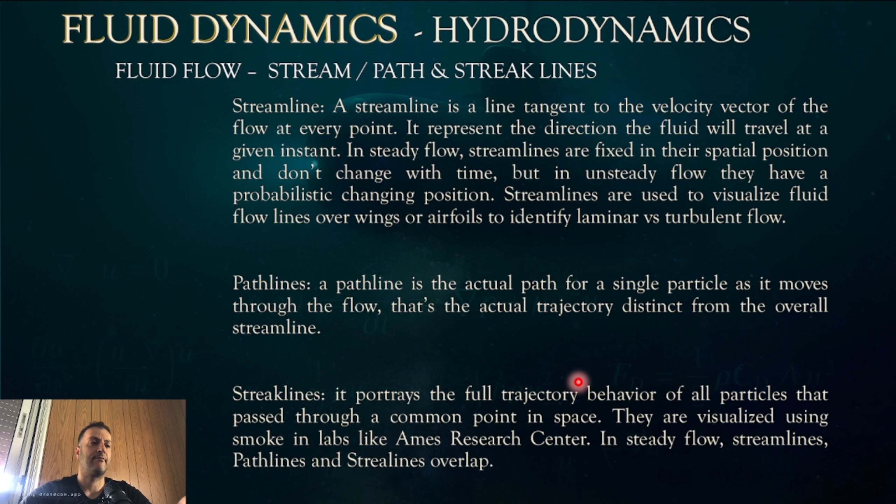Bernoulli's law for incompressible flow. According to Bernoulli, the pressure of a fluid is a constant.

In practice, let's say a fluid is flowing through a pipe with wide and narrow boundaries. The same amount will be flowing across the entire pipe, as mentioned in the continuity law. In wider boundaries, a large quantity flows slower, so we have a higher static pressure because the fluid is more stagnant, more static, pressing against the boundary, the axial boundary, the skin. You have higher static pressure, lower dynamic pressure.

But in narrow boundaries, the same amount will flow quicker, increasing the dynamic pressure. So what actually happens is that the dynamic pressure Q would be higher. However, you would have a lower static pressure, so it would press with a lesser force against the skin of the pipe, for instance. But in all cases, the pressure remains constant. That's the point.

What we're talking about is a constant pressure throughout a pipe system. Now, the entire pressure values remain constant. So P plus Q plus rho GH is equal to a constant.

Now, the pressure of the fluid against, like the pressure generated from a specific height, would be negligible. Why? Because throughout the pipe, there's no differential of pressure between the middle of the pipe and the bottom versus another point where you have a narrower section of the pipe. It's not such a high distance.

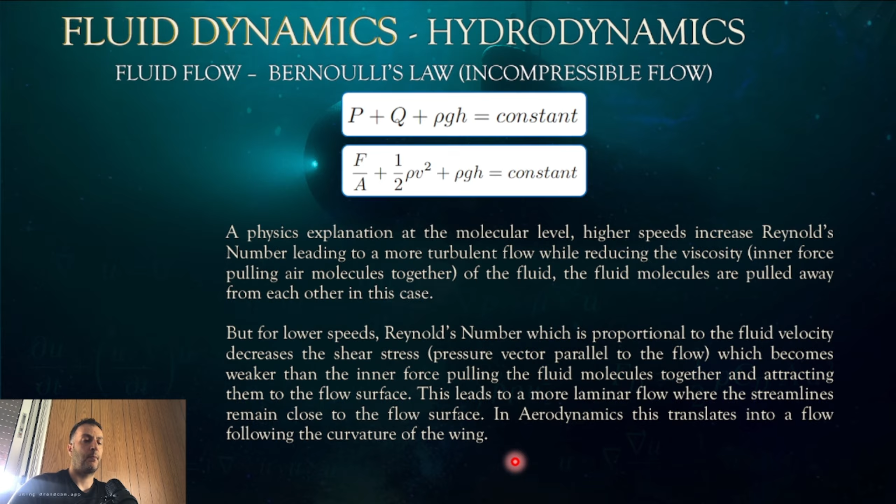Let's talk a little bit about Poiseuille's law. This law describes the laminar flow through a cylindrical pipe, and it quantifies how the flow rate depends on the fluid's properties and pipe geometry. So Q, which is the volumetric flow in meters cubed per second, is how much volume is traversing a cross section within a second.

Q is equal to pi R to the power of 4 (R being the radius of the pipe in meters), times delta P, which is the pressure difference between the two ends of the pipe, divided by 8 mu L, L being the length of the pipe. We notice immediately how the flow rate is inversely proportional to the length. So as much as you have length within the pipe, that would kill the flow rate, slowing down the flow of the liquid.

Meanwhile, when you have a differential of pressure between the first end and the second end, a high difference of pressure would increase the flow rate. And of course the radius of the pipe also influences the flow rate—for a larger radius, you would have a much higher flow.

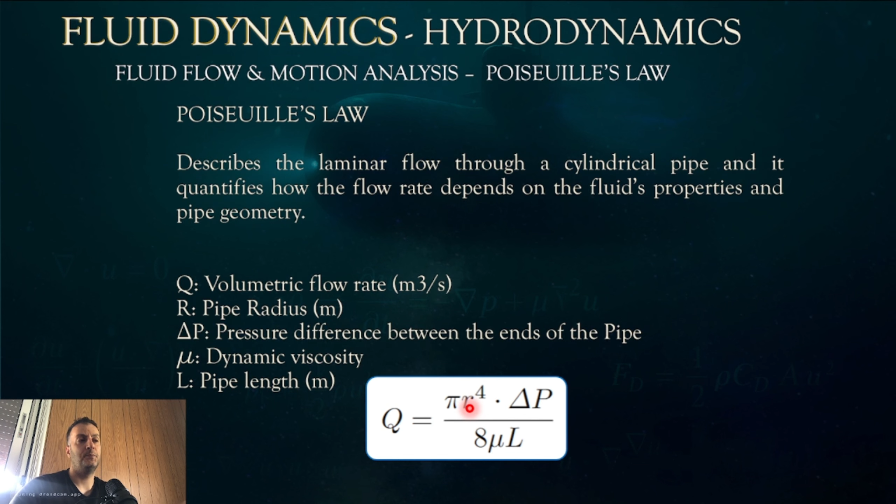Submarine lift underwater. Imagine a submarine fin or tail section underwater. How does it generate lift to climb from a specific depth to a more shallow one—from a very deep point to a more shallow point closer to the surface?

At first, despite the fact that Bernoulli's equations and the concept of lift and drag apply almost the same for both air and water, when it comes to water, it is nearly incompressible. So there's no significant change in temperature caused by the flow. Thus, the density is not changed and neither is the pressure.

As for the viscosity of water, it is higher than that of air, and this makes water more prone, more susceptible to flow separation. It is more sensitive to having its boundary layer—which is the layer of flow close to the surface skin of the hydrofoil—detach from the surface at high speeds.

So flow separation is when the fluid layer close to the surface detaches from it. Usually water, having high viscosity, is more prone, more susceptible to transitioning from a laminar to turbulent flow. This is what we are referring to exactly.

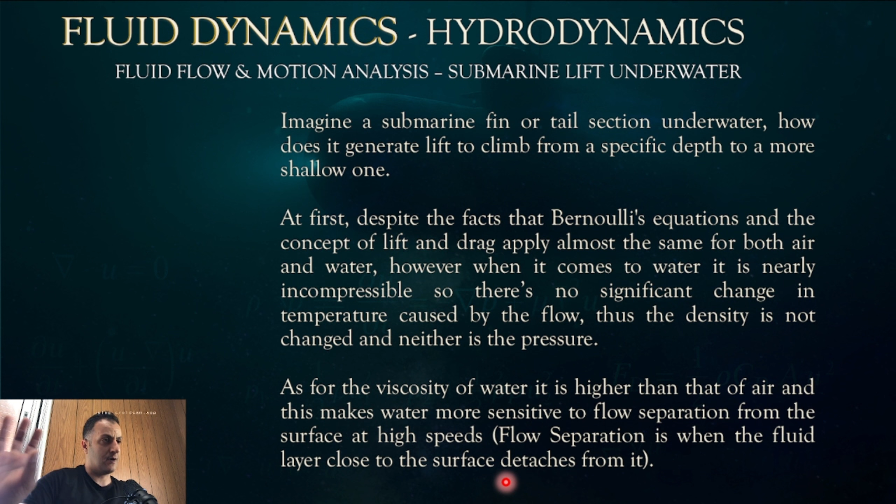Now let's portray the section of a hydrofoil—by the way, it's the same concept for aerodynamic wings. So what is the anatomy or structure of a hydrofoil? At first, the part that hits the water is called the leading edge—that's the edge that cuts through the water. Then the one behind, at the tip, is the trailing edge.

Between them you have a virtual line called the chord line. It is used to measure the angle of attack, which is the angle between this chord line and the flow direction of the water. You also have the upper part of the wing, called the upper camber, and the lower part, beneath the chord line, called the lower camber.

The fluid flows from the leading edge to the trailing edge in two directions: one above the foil through the upper camber, and one below through the lower camber. The chord line is an imaginary line connecting the leading to the trailing edge, used to measure the angle of attack between the flow path and that chord line.

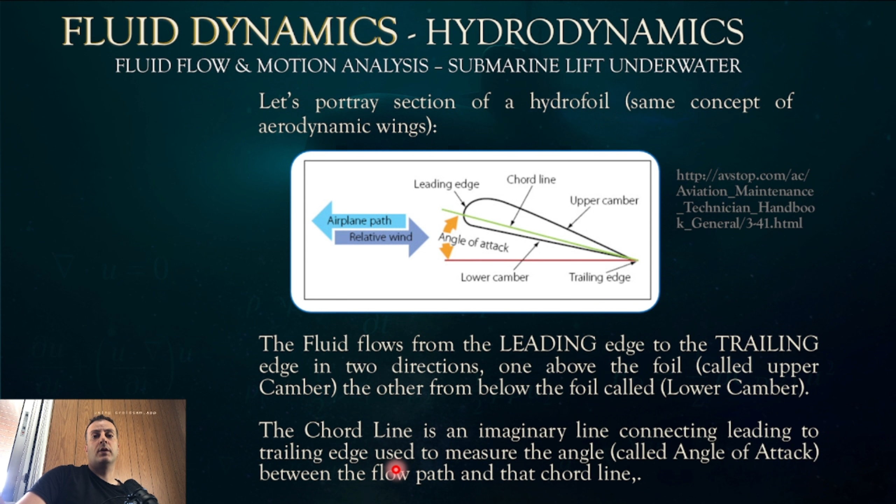Going back to Bernoulli's equation, the pressure is always constant from above or below the tail section or wing section, the hydrofoil in this case. In other words, based on the law of continuity, the mass linear momentum is constant from above and below the hydro wing. So the water flowing from above and that from below should arrive together at the trailing edge at the same time.

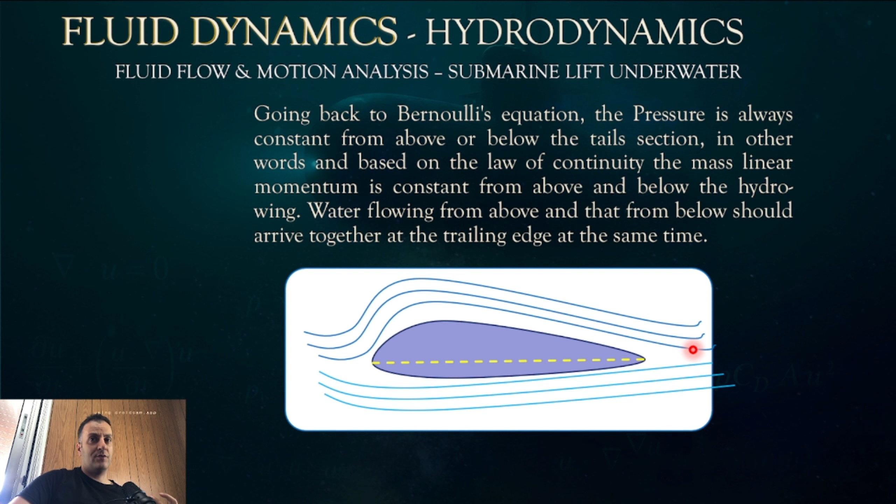So the water hitting the leading edge, flowing around either the upper camber or the lower camber, the same water points that were at the same alignment should arrive at the same time at the tipping edge of the wing section, which is the trailing edge.

However, the water traveling on the upper camber is following a curvature, a much longer path than the water flowing from below around the lower camber. The lower camber is more flat, so the distance traveled by the same molecules of water from beneath the lower camber is much shorter than the one traveled by those going around the upper camber.

Since they need to arrive at the same point or at the same time to the trailing edge, this means that the ones flowing around the upper camber should travel faster. So the dynamic pressure on the upper camber of the wing would be much higher. As a consequence, since we have a pressure constant, the static pressure on the upper camber would be lower than that on the lower camber, much less intense. So the differential of static pressure would make the water from below push harder than the water from above, which leads to a push, which we call lift.

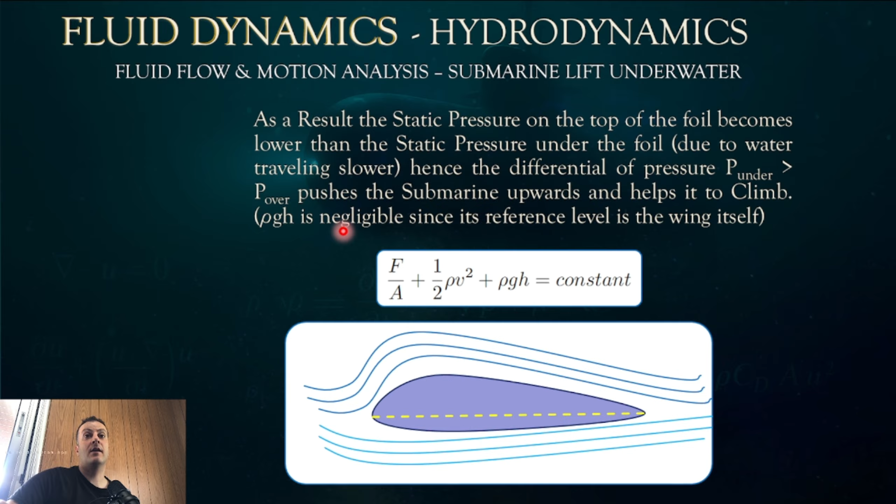Again, as a result of the high velocity for the fluid moving around the upper camber, the static pressure on the top of the foil becomes lower than that under the foil, against the lower camber, due to water traveling slower. Of course in aerodynamics that would be air. Hence the differential of pressure, P under being greater than P over, pushes the submarine upwards and helps it climb, creating lift. Rho GH is negligible since its reference level is the wing itself.

As a reminder: static pressure F over A, plus dynamic pressure 1/2 rho V squared, plus rho GH negligible, is equal to a constant.

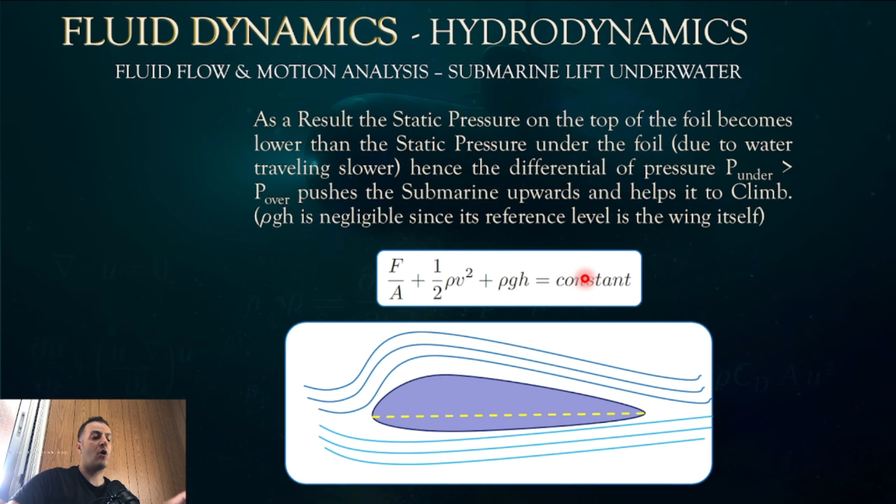Another way in which a submarine or any submersible creates lift is through Newton's third law of action versus reaction. Imagine you extend your hand from a moving car window. If it's still horizontal, you won't feel anything, it smoothly cuts through the air. But as you tilt it down, it gets in the way of the airflow. As it pushes through the flow, the wind pushes it upward, meaning the wind pushes back against your palm, pushing it upward, creating lift.

That's the same thing for hydrofoils in water. When you tilt it down, you increase the angle of attack, the angle between the chord line and the flow direction, which generates more lift and helps it go upward. Of course, with lift you have induced drag as well, which tilts the lift force vector backwards. So the resulting vector becomes slanted, not vertical, because you add the lift vector to the drag vector, which is the induced drag among other factors of drag.

The induced drag is generated because of lift itself, so the resulting vector would be slanted a little bit backwards.

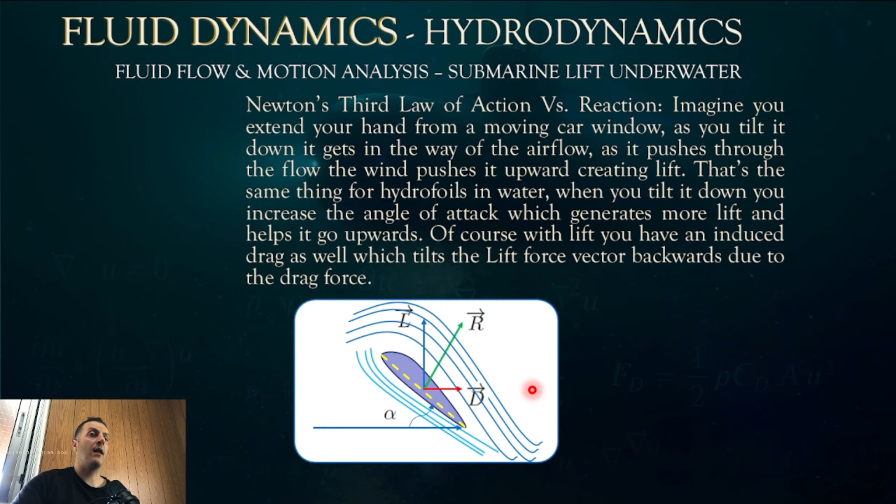As a side note, lift itself is generated, on one hand, by this Bernoulli equation of the pressure differential, and by Newton's third law of action versus reaction when you create an angle of attack against water as the hydrofoil moves through it. You need both of them. The law of Bernoulli alone is not enough to lift a submarine or even an airplane. That's why the airplane drops the flaps in order to take off. In the same way, the hydrofoil needs to tilt the angle back in order to travel or climb to a shallower depth. The lift force, like any force, is expressed in Newtons, and based on the concept we've discussed, there's a direct relationship between lift and dynamic pressure. They are correlated.

Lift and dynamic pressure are directly proportional. So what is the relationship between lift and dynamic pressure Q? L equals CL, the lift coefficient, which depends on the airfoil shape, surface roughness, and Reynolds number, times Q, the dynamic pressure, which is 1/2 rho V squared. That's the same thing shown in the equation below, which is an expansion of the upper equation.

It's still the lift equation. Q is equal to 1/2 rho V squared, V being the velocity, times the surface area. So as you multiply the dynamic pressure by the surface area of the wing or hydrofoil, times the lift coefficient, you get the lift force in Newtons. Rho is the air density in kilograms per meter cubed. V is the air velocity, or in this case the water velocity relative to the hydrofoil, but it's the same concept. S is the wing area, or hydrofoil area in our scenario, expressed in meters squared. CL is the lift coefficient, which depends on the airfoil shape, surface roughness, and Reynolds number.

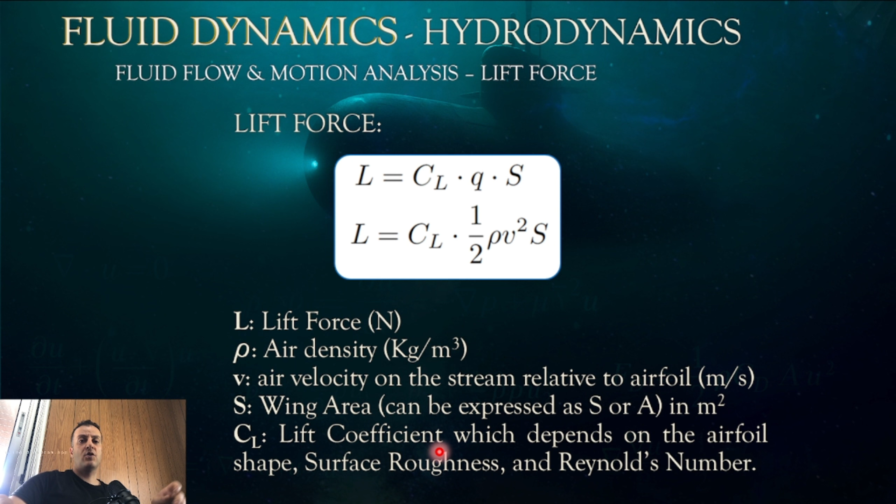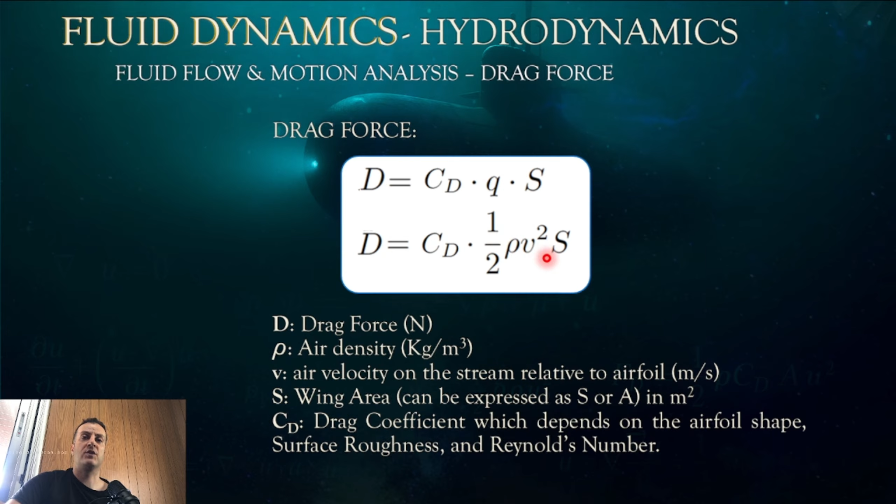The drag formula is very similar to the lift formula. Instead of lift, you have the drag force equal to the drag coefficient times Q. You also see the correlation between lift and drag, because when you have lift, you also have the forces of the fluid pushing against the wing or hydrofoil, and this creates drag. So D equals the drag coefficient times Q, the dynamic pressure, times the surface of the hydrofoil, equals CD times 1/2 rho V squared S. Same concept.

Let's do a small exercise. Say you have a fluid such as water, with density around 1000 kilograms per meter cubed. You have a sphere going through the fluid, flowing through water, or rather the water itself flowing against the sphere. The drag coefficient for the sphere is 0.47. For the water scenario, rho is 1000 kilograms per meter cubed, viscosity of the water is 0.01 poise, and the velocity of the water around the sphere, or equivalently the velocity of the sphere in the water, is 10 meters per second. The radius is 0.01.

Hence, the drag against the metallic sphere as it cuts through the water is calculated as follows. Note that S is the surface of the sphere exposed to the drag, which is half of it. The surface area of a sphere from the outside—not the cross-section of a disk within the sphere, but the full surface—is 4 pi r squared. The area exposed to the water flow, where the drag occurs the most, we assume is half of the sphere: 4 pi r squared divided by 2, equal to 2 times pi, around 3.14159, times the radius squared.

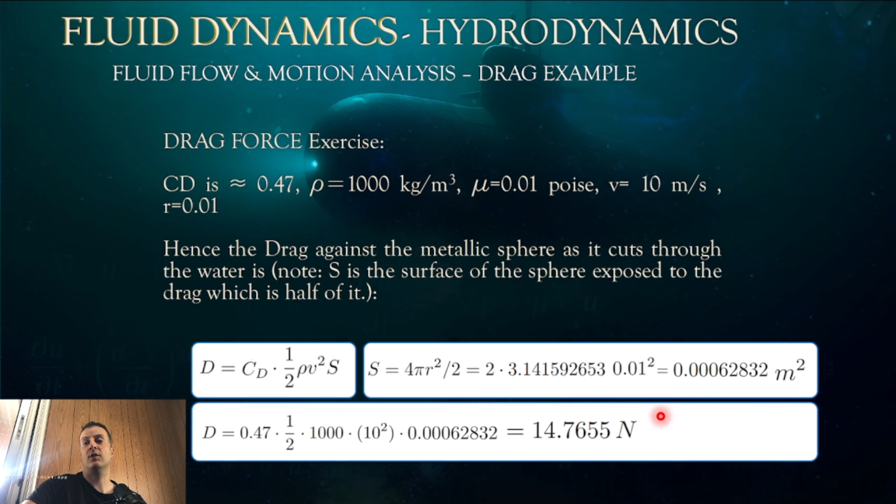Radius is 0.01 squared, so that equals 0.00062832 meters squared. The drag force equals the drag coefficient times the dynamic pressure, which is 1/2 rho V squared, times S: 0.47 times 1/2 times 1000 times velocity squared, times 0.00062832, which is the surface area exposed to the flow, equals 14.7655 Newtons.

Let's talk about Prandtl's theory and induced drag. According to Prandtl, a German scientist and engineer, elliptic wings are the most ideal for well-distributed circulation, generating lift with minimum induced drag caused by the downwash. We'll talk about what drag is and what the downwash is.

When the wing section, or hydrofoil, cuts through the water, it pushes against the water, so the water pushes back against the wing and generates lift. This is action versus reaction, Newton's law. But as the water flows down against the wing or hydrofoil, it creates what is called induced drag caused by the downwash. The downwash means the water flowing down after it pushes the wing up, which creates an induced drag.

Let's start with the concept of circulation. What is circulation? The circulation at point y is the sum of all velocity vectors around a foil. It's the integration of all velocity vectors over a wing section.

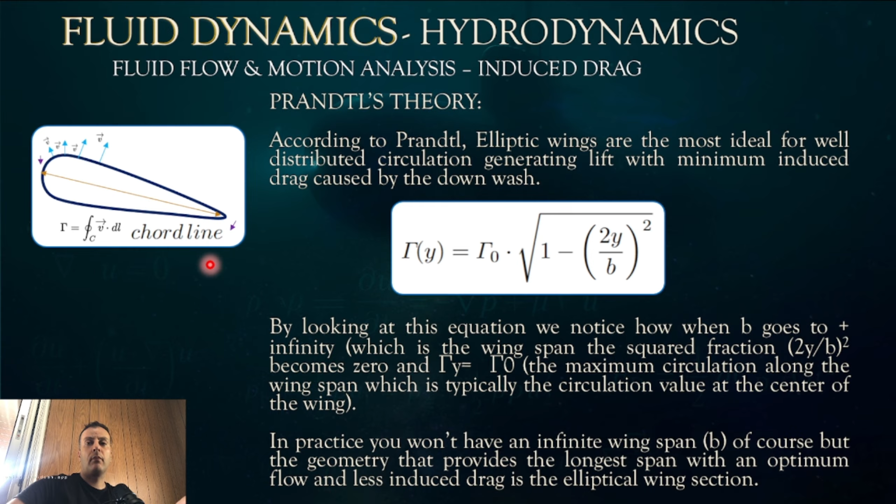Aspect ratio: in the previous slide we already addressed B, the wingspan, or the distance between the two tips of the wings, either aero wings of an airplane or hydrofoils for a submersible. Again, B is the distance from the first tip of one wing to the second tip of the next wing, or the width of the submersible. Now, aspect ratio is a ratio also related to the wingspan. It defines the geometry of the wing.

We have two types of wings usually. You have the rectangular simple wings. For that one, the aspect ratio is the ratio between the wingspan B, or the distance between the two tips of the wings, and the chord line length, the line connecting the leading edge of the wing to the trailing edge, only in rectangular wings.

However, in more complex wings, such as the ones shown here, it is the ratio between the wingspan B and the overall area of the wings, which is S here plus S here, the entire surface of both wings. For rectangular wings, AR, or aspect ratio, equals B over C, wingspan divided by chord line length. For generalized wings, AR equals B squared, the wingspan squared, divided by the surface area.

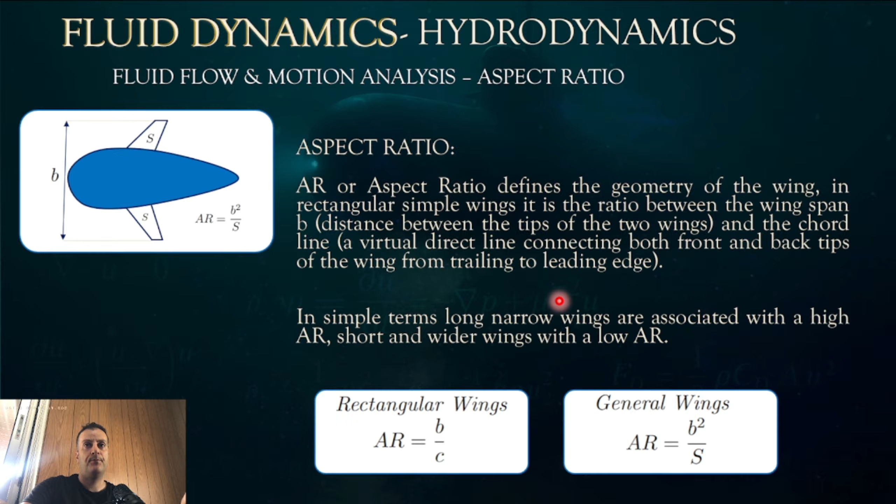Aspect ratio impact: the aspect ratio is not an unintentional measurement. It actually has a purpose behind it, as it is an essential factor that determines the hydrodynamic performance of the hydrofoil. We'll represent the difference between high and low aspect ratio in relation to different hydrodynamic parameters such as lift and drag. Let's start with high aspect ratio.

For high aspect ratio, it means that B (span) is greater than the surface area, or C for rectangular shaped wings. For high aspect ratio, the wings would be longer because B is very high, and narrower to get a smaller surface, like gliders, for instance, from an aerodynamic perspective.

The same concept applies for water. So characteristically, the lift factor is more efficient. They have a lower induced drag because of the downwash when the water flows through the hydro wing. The induced drag is usually smaller than that for a low aspect ratio, but structurally they are weaker. Why? Because the tips are far from the fuselage, so they are prone to bending.

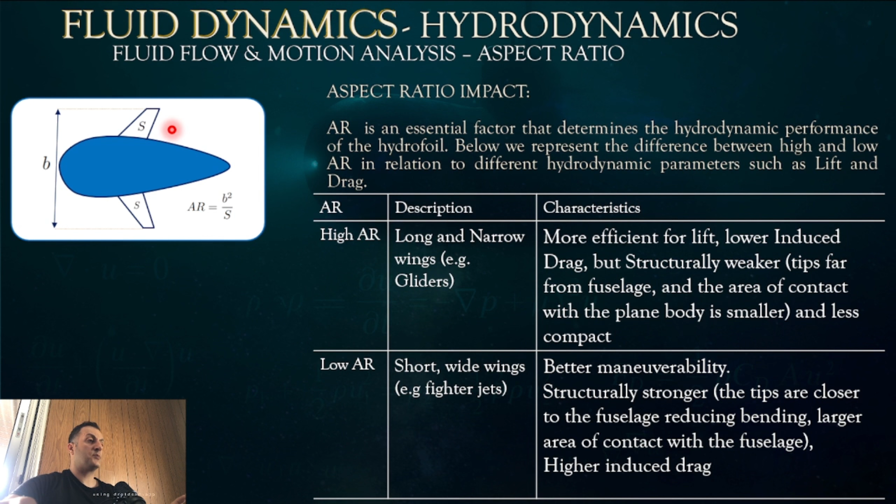Downwash and induced drag: in the previous slide, we touched on these two phenomena, downwash and induced drag, without expanding on them. So let's talk about these two things, and how they happen. What's the main cause behind them?

For the downwash, according to Newton's third law, for every action there's an opposite and equal reaction. So when the submarine's hydro wing generates lift as it pushes the water down and cuts through the water with high velocity, the water flowing down creates a downwash. But in its motion, it pushes back, reacting against this hydrofoil motion and generating what is called induced drag.

This is different than the drag that comes because of the motion itself; this is another component that adds to that drag. Induced drag means it is caused by the lift itself, caused by the action to generate lift on the hydrofoil. This is why it is called induced. So this downward flow of deflected water is called the downwash.

This phenomenon is usually more noticeable, visible, and observable behind the wingtips, as it creates vortices, eddies, and twirling spirals you see behind these hydro wings for large boats, submarines, etc.

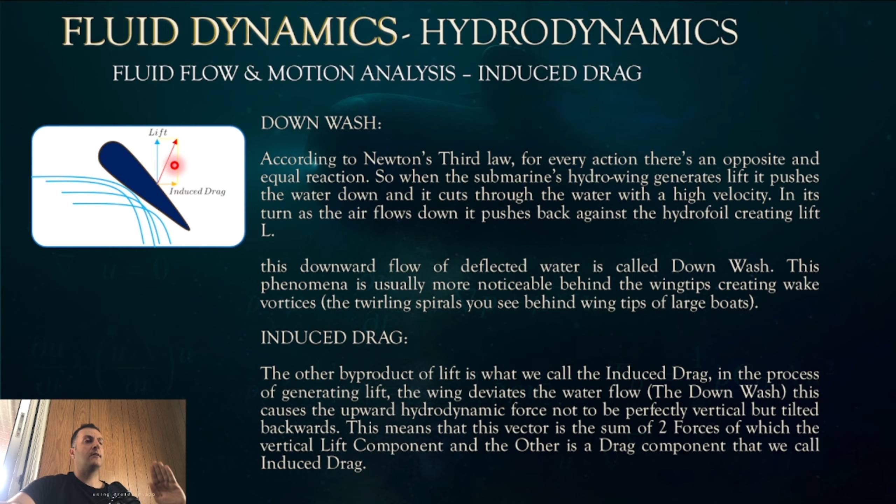What is the value of the induced drag? Induced drag is given by this equation: Di, or drag induced, is equal to pi E Q S divided by L squared.

P, or pi, is the same pi of circles. E is called the Oswald efficiency factor, or lift efficiency factor. It's a value between 0 and 1, determined by the type of wing or hydrofoil and its shape. For an ellipsoidal or elliptical shaped wing, you'd have a higher value for lift efficiency than for other types of wings or sectional shapes.

You have Q, the dynamic pressure. The dynamic pressure always has to do with the induced drag, the drag and the lift - they are correlated - times S, which is the surface area. For a larger surface, you'd have a higher induced drag, but it's inversely proportional to L squared. So for a more efficient lift, you'd have a smaller induced drag value. Again, Di equals pi E Q S divided by L squared.

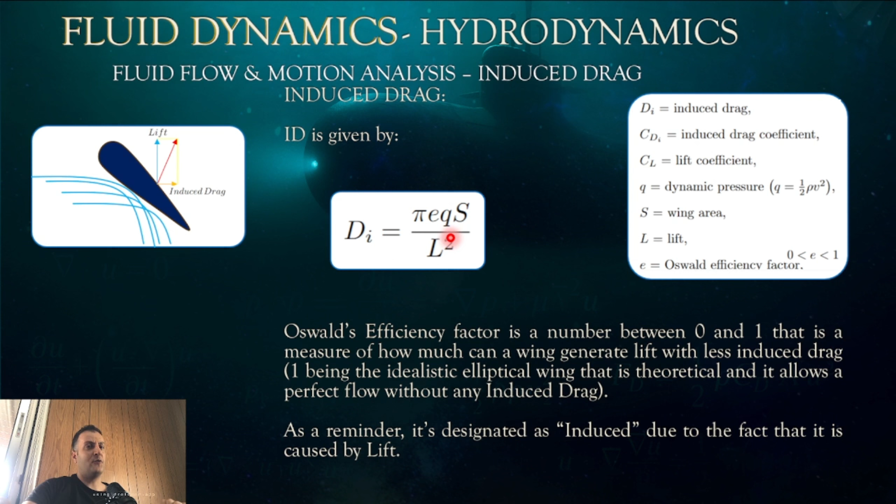All right, Prandtl's theory. A real wing is a finite model that produces a downwash behind it, which alters the effective angle of attack - not the real angle, but the effective angle, the angle that's actually working at the attack. This theory is a foundational fluid dynamics and aerodynamic model developed by Ludwig Prandtl, a German engineer, in the early 20th century, pertaining to finite aerodynamic wings.

The theory relates the geometric attack angle with the downwash induced angle. You have the geometric attack angle, which is different than the downwash induced angle, and the resulting lift, to come up with a consistent distribution. So it is correlated with circulation - let's put it this way.

At first, this theory applies when considering a steady, incompressible, and inviscid flow. Inviscid means the viscosity doesn't change. And it applies at a small angle of attack, also for a thin wing, which is the case for most commercial aircraft.

So what is the formula? Alpha y - it means that the actual angle of attack is different than the geometric angle of attack, which you measure by finding the angle between the flow direction and the chord line. The actual, effective angle of attack, the one playing out, is equal to the geometric angle of attack minus gamma y, which is the circulation, divided by 4 pi v, v being the velocity.

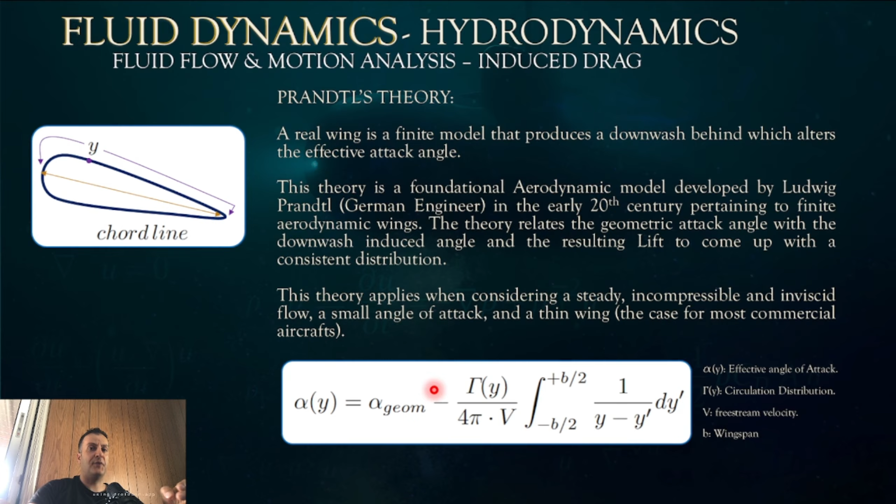So for a higher velocity, let's say v goes to infinity, this entire component here becomes 0, so the effective angle of attack becomes equal to the geometric angle of attack. Or when that circulation ratio, y minus y prime, becomes infinite - when this entire component becomes 0, then alpha y becomes alpha geometric.

Going back to aspect ratio, AR. By resolving Prandtl's equation, a relationship was established between the coefficient of induced drag and the aspect ratio. So with higher aspect ratio, we have less induced drag. This is what we mentioned before.

Let's break it down for a visualized airplane model or submersible model, and try to figure out by reasoning whether this submersible or airplane would have a high or low aspect ratio, and how it would perform aerodynamically or dynamically in the fluid.

This is what interests me the most here. The drag coefficient is equal to the lift coefficient squared, so they are truly related to each other, divided by 4 pi e, which is the Oswald factor, times the aspect ratio. Again, the aspect ratio is the ratio between b squared, or the wingspan, divided by the surface area.

So for a high aspect ratio, you have less induced drag. For longer wings, you would have less induced drag, correct? This is what we're talking about mainly in this case.

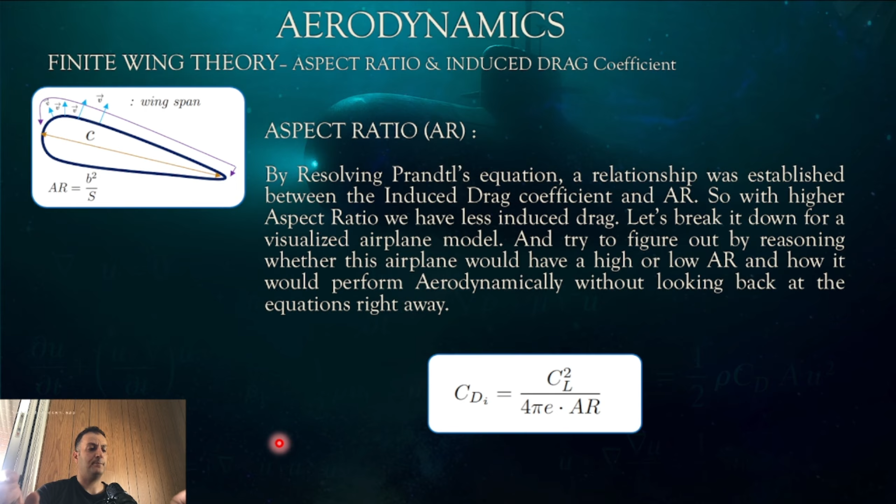Let's do an example for Reynolds number. If we recall the other exercise where we found the drag against a metallic sphere of radius 1 centimeter drowning in water, let's calculate right now the Reynolds number for the flow. So the metallic sphere having a radius of 1 centimeter, or 0.01 meters, is drowning in water.

Rho is equal to 1000 kilograms per meter cubed at 20 degrees Celsius. Viscosity is equal to 0.01 Pascal second. Actually the real value is 10 to the power minus 3, but let's assume that this value is correct. In this case, with a speed of 10 meters per second, what is Reynolds number?

So RE, or Reynolds number, is equal to rho V L divided by mu. L is the sphere diameter in this case, or the distance of the flow we are considering. So Reynolds number equals rho V L divided by mu, which is 1000 times 10, the velocity, times 0.02, which is twice the radius, the diameter being twice the radius, or 0.02 meters, divided by 0.01, which is the viscosity, equals 20,000.

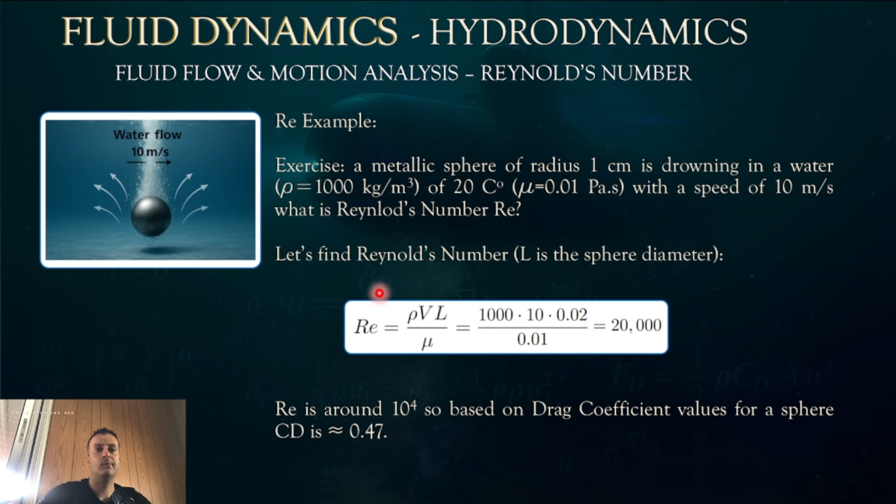Forces acting over a hydrofoil. Let's consider, for instance, a submarine, like in this illustration. What are the different forces acting against this submarine? At first, T is the thrust force pushing the submarine forward, usually generated by the propellers, the system of blades at the rear end of the submarine, not shown in this illustration.

As they push the water backwards, the water propels the submarine forward. That is the conservation of linear momentum. This is also Newton's third law of action versus reaction. You push the water backwards, so the water propels the submarine forward.

Then D is the counteracting force against the thrust, which is the drag. Both the one induced by lift, which we've referred to before when rotating or tilting the hydro wings, and the one that is generated by the movement itself as the submarine cuts through the water layers.

Then you have L, which is the lift force generated by both the attack angle and the shape of the hydrofoil wing. By the way, in leveled motion, meaning you're holding the same altitude, usually you don't use much attack angle. You are counting alone on the shape of the hydrofoil, the shape of the hydro wings, which generate enough lift to counteract the weight of the submarine.

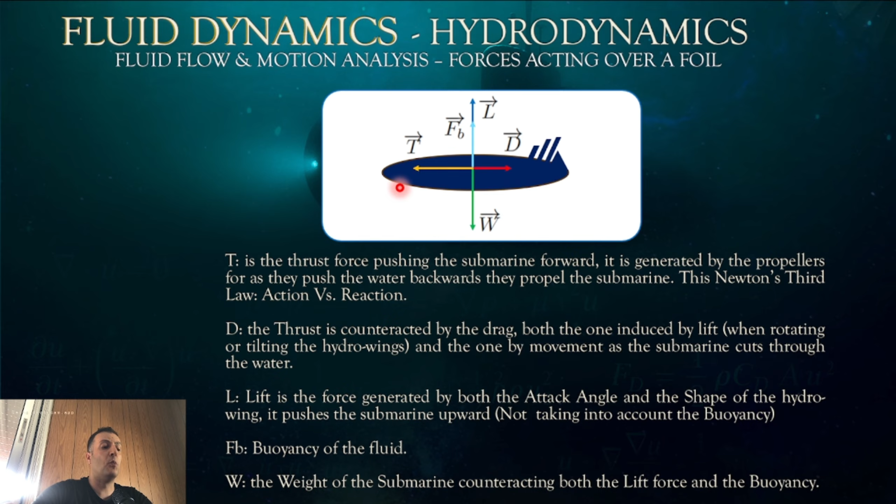And finally, the final force is the weight of the submarine counteracting both the lift force and the buoyancy, which pushes the submarine downward. So when these forces are equal to each other, you have a dynamic equilibrium, meaning the entire submarine is moving at the same velocity. That is Newton's first law of equilibrium, both dynamic and static. Static means it is motionless, perhaps on the dock, and dynamic equilibrium means there's no acceleration or accelerated variation, so the velocity is kept the same throughout the motion inside water.

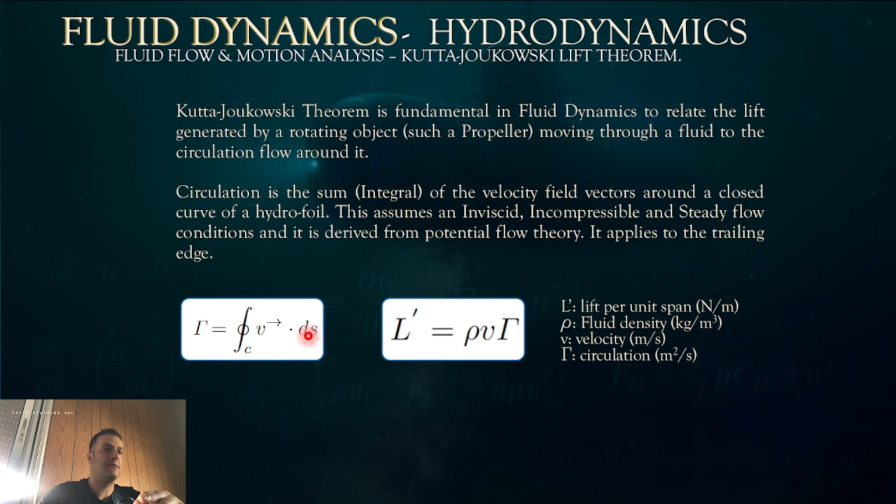So the lift force is equal to rho times V times gamma. In other words, it is equal to the fluid density in kilograms per meter cubed, usually 1000 for water, but it changes due to the temperature of the water at specific depths, times the velocity of the fluid around the submarine, times the circulation value, which is an integration of velocity vectors around a closed loop times ds, integrated throughout the surface.

Now let's talk about another concept, which is the energy head. What is the energy head, or head of pressure? By definition, it is a way of expressing different forms of energy, such as pressure, velocity, and even elevation, as their equivalent in potential energy, or an equivalency value for fluid height in a column. So what would be the equivalent of dynamic pressure in height terms? That would be 1/2 rho v squared equal to the pressure over a height, which is rho g h. What is the equivalent height to get the same value for dynamic pressure? We are expressing different types of pressure energies in terms of height or elevation. This is essential for understanding how energy is transferred in flowing fluids, like in Bernoulli's equation.

So you have three types of heads. First, the elevation head, or Z, which is the potential gravitational energy of a fluid because of height - the height above a reference level, for example a water reservoir mounted on concrete pylons, that would be the height from the water tank down to the ground where the poles are standing. Then the pressure head, which is P over gamma, the height of fluid that would cause that pressure, where P is the pressure and gamma is rho g, the specific weight of the fluid causing that pressure.

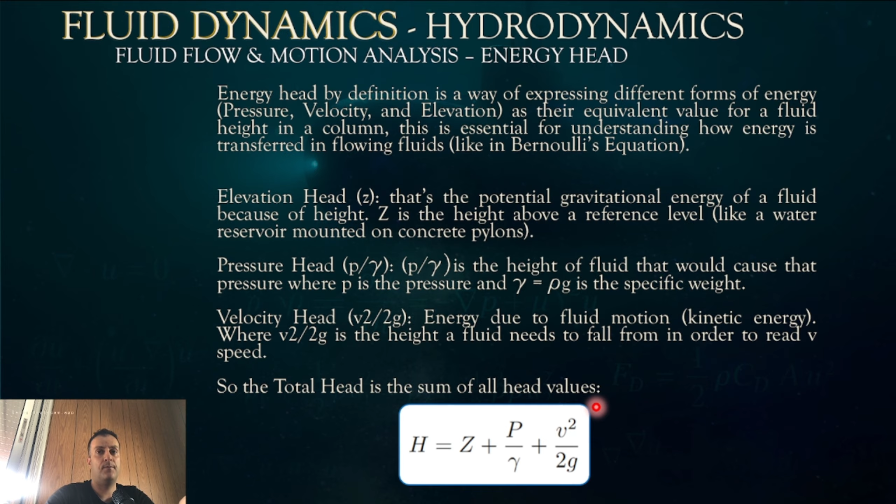To give a practical example, let's say water flows through a pipe from a tank. At a point you measure elevation: the elevation of the pipe is 5 meters, pressure P is 50,000 Pascal, and velocity V is 3 meters per second. The fluid density is rho equal 1000 kilograms per meter cubed. The gravitational acceleration is about 9.81 meters per second squared on the surface of the Earth, that's the average, since gravity is higher at the poles where you're closer to the core, and slightly lower near tropical areas where the Earth is a bit more compressed and farther from the core.

So let's convert the pressure to pressure head. First you have P over gamma for the pressure head, which is 50,000 Pascal divided by gamma, gamma being rho times G, the density 1000 times the gravitational acceleration 9.81, equal to 5.1 meters.

Second, the velocity head, which is V squared divided by 2G. V is 3 meters per second, squared, divided by 2 times 9.81, equal to 9 divided by 19.62, around 0.46 meters.

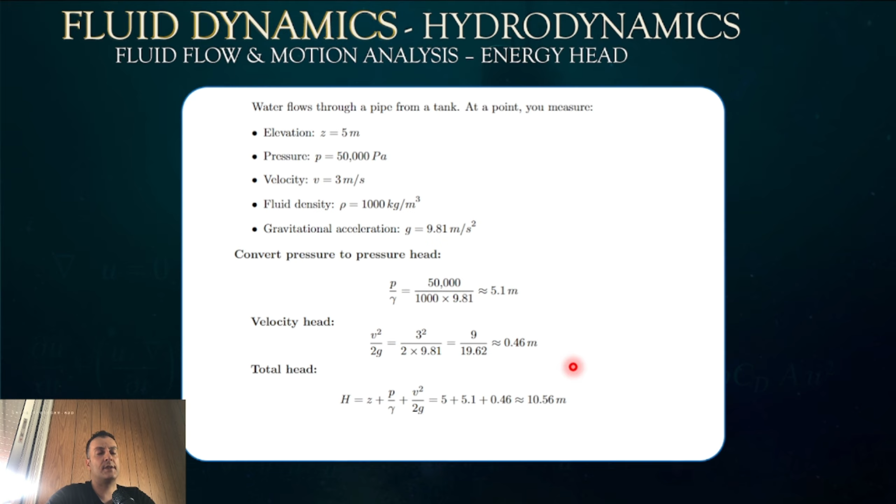Let's talk first about the laminar boundary layer. Laminar boundary layers appear for relatively low speeds and smooth surfaces. We cannot have rough surfaces if we want the flow to remain perfectly laminar, meaning it is layered, one layer on top of the other, with no turbulence and no rotational trajectories for the fluid particles.

Characteristics: the flow is smooth, with ordered layers of fluid flowing on top of each other, with a regular curvature following that of the wing surface. Velocity vectors are smooth and parabolic, increasing gradually from the surface.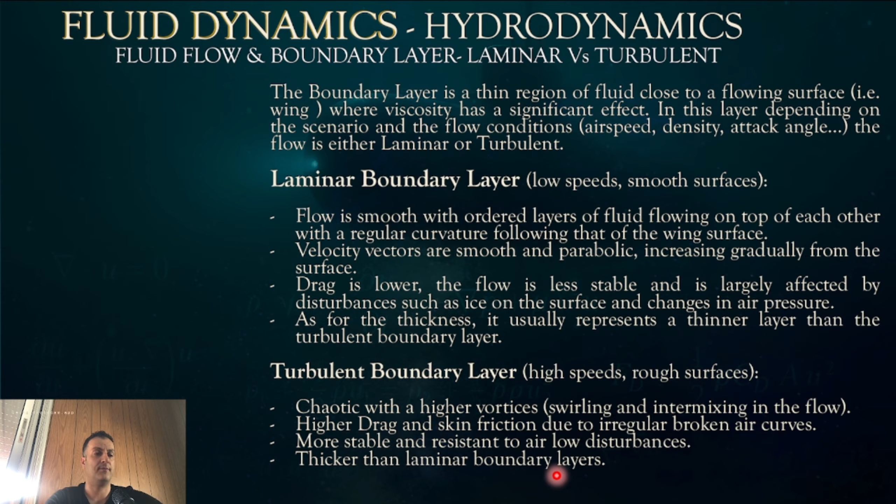As a reminder for laminar versus turbulent flows: for laminar flows, the flow directions or lines are parallel to each other, where the maximum flow speed is at the center of the flow, and there's a stability of velocity across different lines. As for turbulent flows, you have rotational flow, vortices, and an intermixing between different molecules of the fluid, such as in a pipe flow. The u vector, the velocity vector, is changing - it's not stable, it's non-uniform.

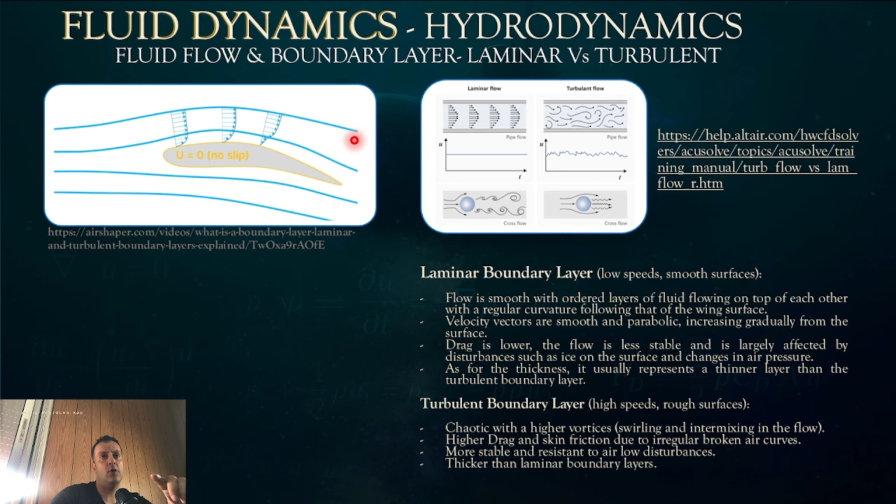Also, for laminar flow, the thickness of the boundary layer is very thin - it's very close to the surface of the hydrowing. For turbulent flows, you have a much larger separation between the curvature of the flow and the hydrowing itself.

Now let's talk about the values of velocity for a laminar flow - velocity vector u and boundary layer thickness. For a laminar profile, the characteristic is u divided by U, where u, or small u, is the velocity at a distance y from the surface, and U is the free stream or maximum velocity. This is around y, the distance, divided by delta, the boundary layer thickness, to the power of n, where n represents a shape factor or velocity profile characterizing the distribution of velocity around the boundary layer.

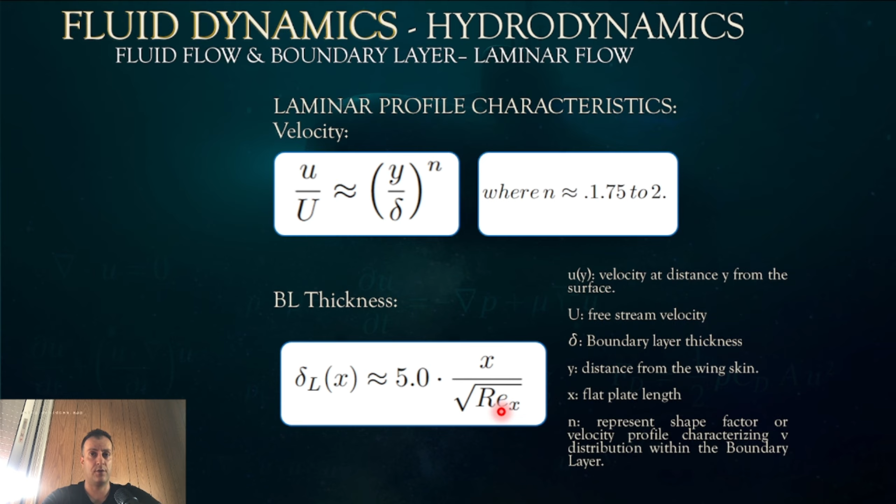n is around a value from 1.75 to 2, depending on the shape - you can get it from a chart. As for the boundary layer thickness, it is around 5 times x, where x is the flat plate length, or the length of the chord line, divided by the square root of Reynolds number.

As for turbulent profile characteristics, the velocity u divided by U - again u is velocity measured at a distance y from the surface skin. So if you go up from the hydrowing, we are trying to measure the velocity of the flow at a distance y, a thickness y from the wing, divided by U, the free stream velocity, which is around y divided by the thickness of the boundary layer.

By the way, y is less than delta. Y is at a point depending on where we are measuring, but delta is the thickness of the boundary layer, so y is measured in the same direction as delta - it is the thickness from the surface of the hydrofoil to a specific point.

So u divided by capital U is around y divided by delta, to the power of 1/7. Again, delta is the boundary layer thickness, and y is the point of measurement above the wing, the hydrowing or the aerodynamic wing, depending on the scenario.

As for the boundary layer thickness, it is around 0.37 times x, where x is the cross-sectional distance of the wing from the trailing to leading edge, divided by the square root of Reynolds number to the power of 1/5, where Reynolds number equals ux divided by nu, the kinematic viscosity.

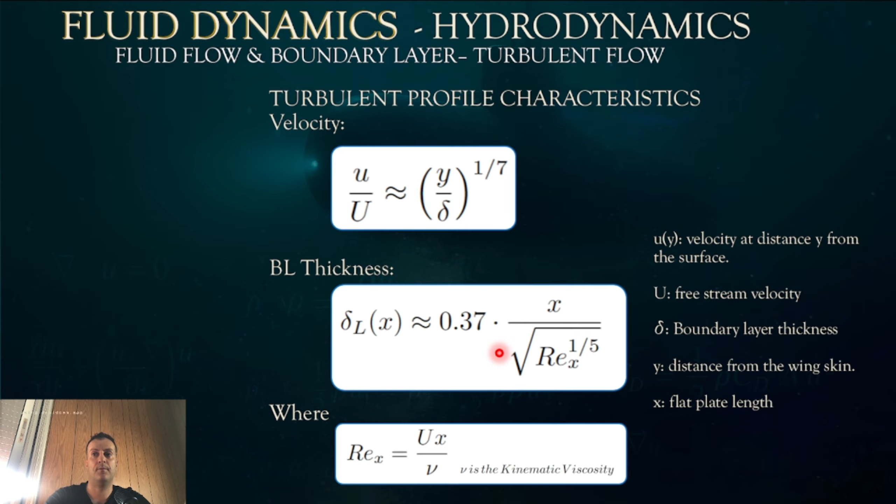Flow separation happens when the boundary layer adhering to a surface detaches. This is mainly due to adverse pressure gradients overcoming viscosity. Viscosity keeps liquid molecules ordered in a streamline and close to the flow surface. This usually happens when the fluid slows down to a point where the streamlines become very weak and are easily broken by adverse pressure. So the adverse pressure pushes against the viscosity on the surface area of a hydrofoil, peeling away this boundary layer - the fluid flowing close to the wing surface moves slower due to viscosity.

Because viscosity is high near the surface, near the skin of the hydro wing, especially when the wing crosses a region with high liquid pressure, like cooler water, or when the velocity is very low. If the fluid is moving very slowly, like in low power engine or propeller configurations and hence lower water speeds, adverse pressure can pluck the boundary layer away from the hydro wing, leading to flow separation.

So the boundary layer separates from the hydro wing, and it has dire consequences at times for airplanes more than for hydrodynamic vehicles.

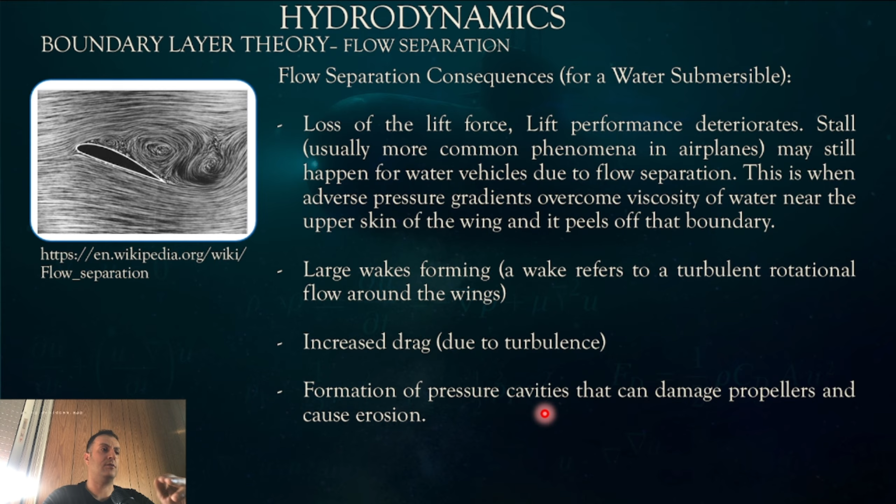Going back to head pressure, which is the equivalent of pressure in height terms, what are the major and minor head losses? In fluid mechanics, head loss represents the loss of mechanical energy or pressure head due to friction and disturbances as a fluid flows through pipe systems interconnected with different widths and curved connections and fittings. So the total head loss is equal to major head plus minor head.

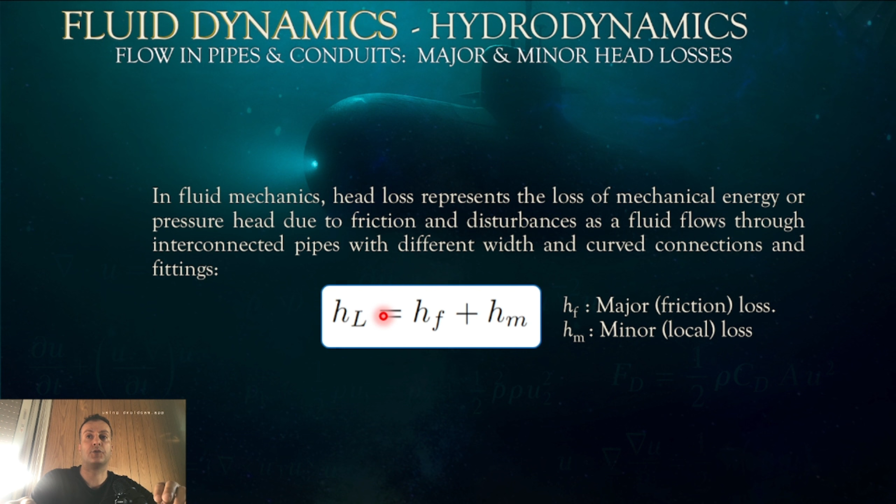Major head is the loss due to friction. It is the loss of head or pressure caused by the friction between the liquid and the internal skin surface of the pipe over a length L, given by the Darcy-Weisbach equation. So HF, or friction head, major head, is equal to F, the friction factor, times L divided by D, where D is the diameter of the pipe and L is the length, times V squared over 2G.

V is the velocity squared, divided by 2G. G is the gravitational acceleration, which is 9.81 meters per second squared. As for F, it is the Darcy friction factor, a dimensionless factor. It depends on Reynolds number and the relative roughness of the pipe from the inside, taken from the Moody chart or empirical equations.

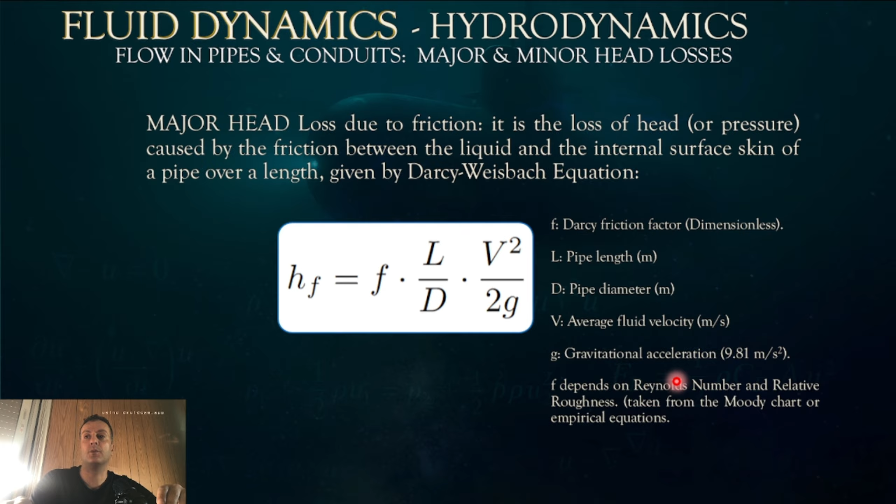For minor head loss, also called local loss, it is the loss caused by fittings, bends, valves, expansions, and other factors that cause flow disturbance and a change of its parameters. HM, or minor head, is equal to K times V squared divided by 2G. K is the loss coefficient depending on fitting type.

For a 90-degree elbow, K is equal to 0.3, actually between 0.3 and 1.5. A sudden contraction, sudden narrowing of the width of the pipe, gives you a K value of 0.4 to 0.9. Sudden expansion 1.0, fully open gate valve 0.2, globe valve open 10, and a T, flow through a branch, gives you a value of 1.8. So as we see, both losses are proportional to V squared, multiplied with V squared divided by 2G.

Let's do an exercise. You have a 20-meter pipe with a diameter of 0.1 meters. It carries water at 2 meters per second with 2 elbows, each elbow having a K of 0.75, a valve having a K of 0.5, and its friction factor, small f, is 0.02. Let's calculate its total head loss.

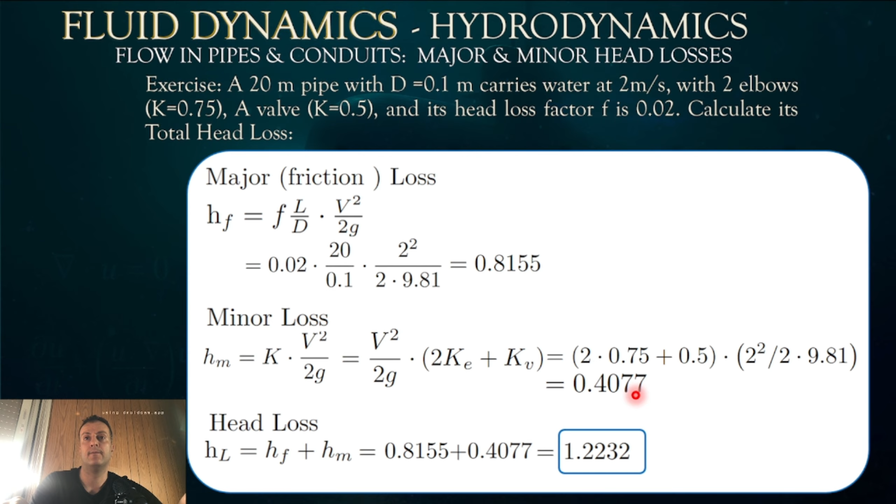Series pipe systems or serial pipe systems. What are they? These are pipes connected one end after the other, end to end. The flow rate Q is constant in such case. So the head loss is the sum of all the head losses throughout all sections. HL is equal to HL1 plus HL2 plus all the HLs, all the head losses, summed up together.

In other words, the formula is HL equal to the sum between I and N, where N is the number of sections, times Fi, which is the friction factor, times Li, the length for each pipe, divided by the diameter of each pipe, each connection, times Vi squared again for each section of pipes, divided by 2G.

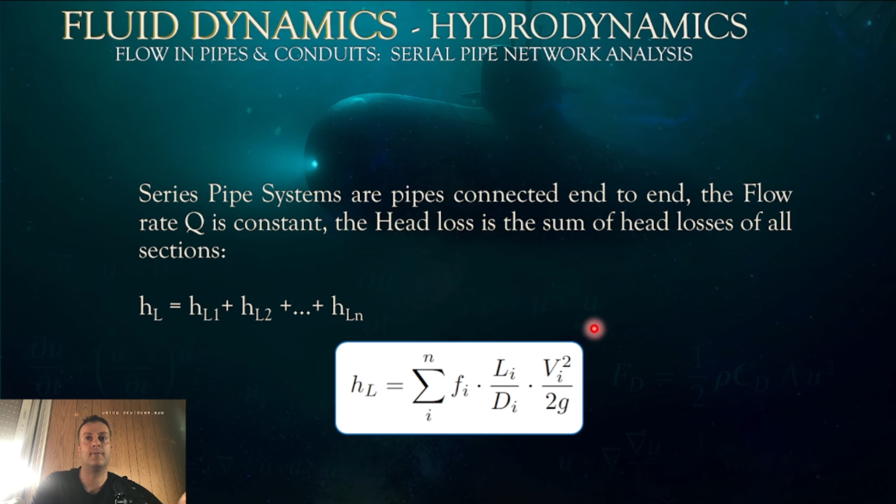As for a parallel pipe, now a parallel pipe is different. Here you have a flow that divides, or it is divided into two or more branches. So the original flow is broken down into multiple flows. The overall flow, the total flow, is equal to the sum of all flows going through the different pipe systems that are parallel. Similar concept, by the way, in electricity. It is the current being broken down or distributed into multiple wires.

The head loss in such case is equal for each path. All the head losses are equal for the sections where the water is being divided. At a junction, mass is conserved. We have the continuity principle. So sigma Q in, the flow rate at the input side, is equal to the flow rate at the output side.

Now for the Hardy Cross method, Q, which is flow rate, you have R, resistance coefficient, N is the flow exponent. HL is equal to RQN, where R, the flow resistance or resistance coefficient, times Q to the N, or the flow rate. Delta Q, which is the differential of the flow rate, is equal to minus sigma head loss divided by N, divided by the sum of all resistance coefficients, also divided by N.

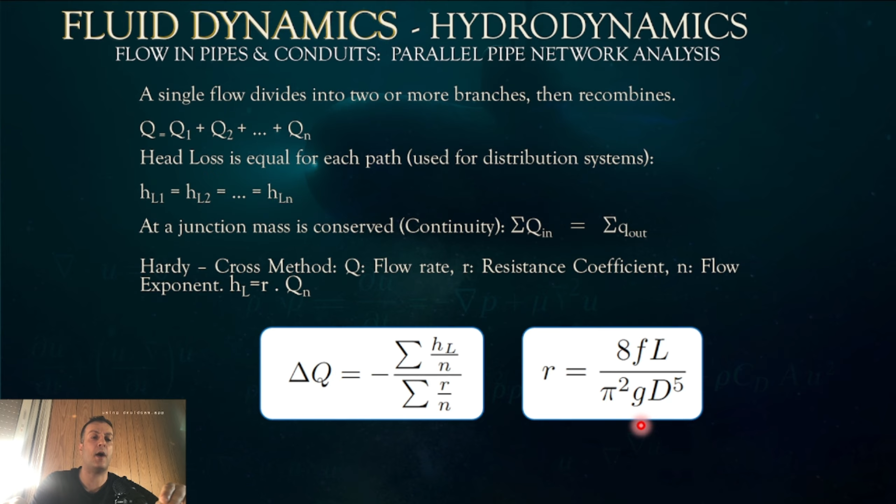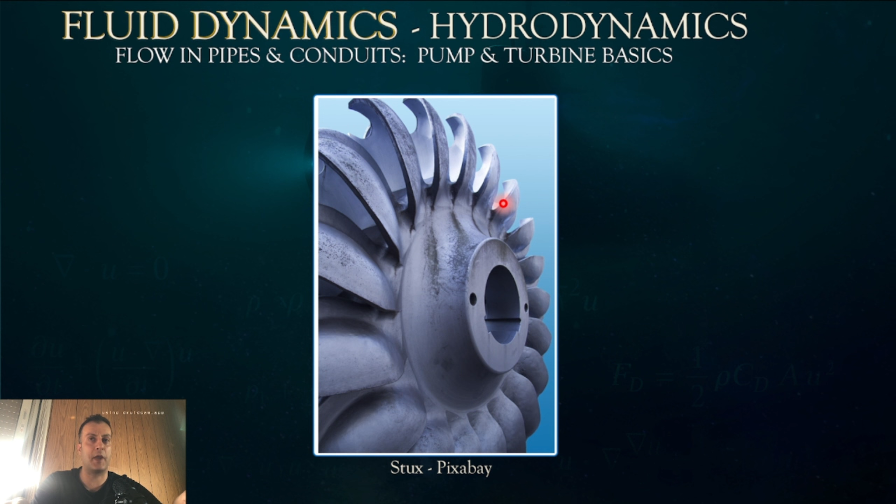Let's start with pumps. What is a pump actually? What is the definition of a pump? A pump is a mechanical device that adds energy to a fluid to move it from one location to another, usually from a high pressure point, which is a low altitude, to a low pressure point or high altitude location.

There are two typical types of pumps. You have the positive displacement pump, which traps a fixed volume of fluid and forces it through an outlet, such as piston pumps within cars, suitable for high pressure systems having a low flow, low quantity to displace from one location to another. The second type is the dynamic pump, which works using centrifugal force. It transfers energy to the fluid by accelerating the fluid throughout a rotating impeller, which gives it a centrifugal force, pushing it outwardly. So it is suitable for larger flows and low pressure transfers such as irrigation systems.

So they give the fluid a centrifugal force, and thus the fluid gains momentum and it moves this way. This is how it works versus the positive displacement pump.

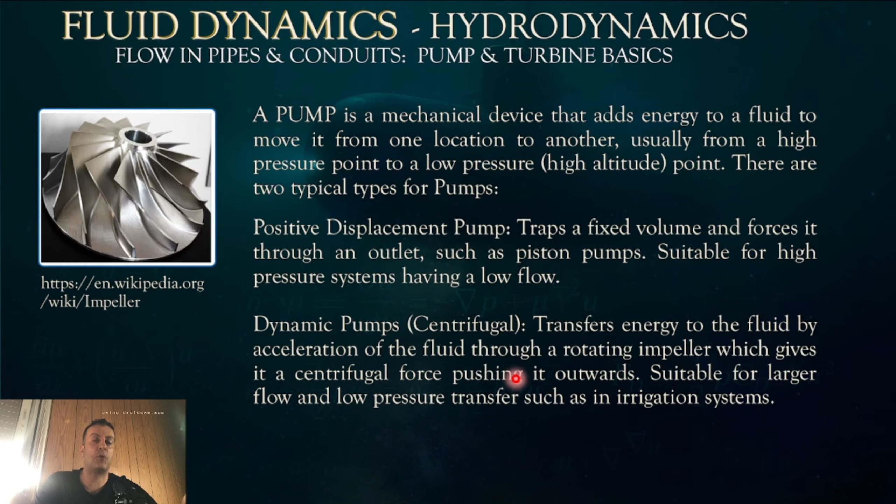The equation of a pump. At first, let's talk about the total head. Total head, or total head pressure, is equal to the static head pressure plus h velocity plus h friction.

Pump power expressed in watts is equal to rho g q h, where rho is the fluid density in kilograms per meter cubed, times g, the gravitational acceleration, or 9.81 meters per second squared, times q, the flow rate in meters cubed per second, times h, the total dynamic head we saw earlier.

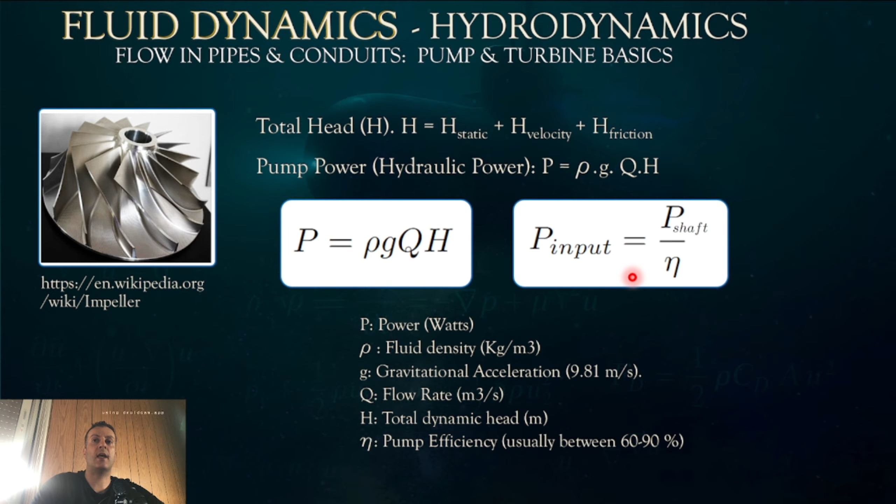Now we need to note that the power of the shaft is equal to eta times the power of input. It means that the power of water exiting the shaft is not actually the input because you have losses. So eta is the pump efficiency, usually between 60 to 90%. So although the power at the input would be high, the power at the shaft, at the end, the first opening so to speak, is equal to 60 to 90% of the power at the input due to losses.

Turbine. A turbine is the reverse device of a pump. While a pump transfers energy to a fluid to increase its pressure, forcing it to move, turbines extract the energy of a flowing liquid to convert it to mechanical energy, usually also to electrical power. This is usually used to generate electricity, like hydropower, steam cycles, etc.

Types of turbines: impulse turbine, which is the first type indicated in this picture, like a bucket-like turbine for the Pelton wheel, also called this. It induces rotation through the fluid hitting the turbine blades, and it transfers momentum through that, like the Pelton wheel. So the fluid hits the turbine blades, inducing rotation and transferring momentum.

The second type is the reaction turbine, where the fluid passes through the blade, and both pressure and velocity change. In the first type, you have a static pressure and the velocity and pressure do not change, since it's an external system — the Pelton wheel is outside of the fluid, and the fluid hits the Pelton wheel. Meanwhile, for reaction turbines, the fluid passes through the blade, both pressure and velocity change. Static pressure increases and velocity slows down. In such case, blades are immersed fully within the fluid, like water.

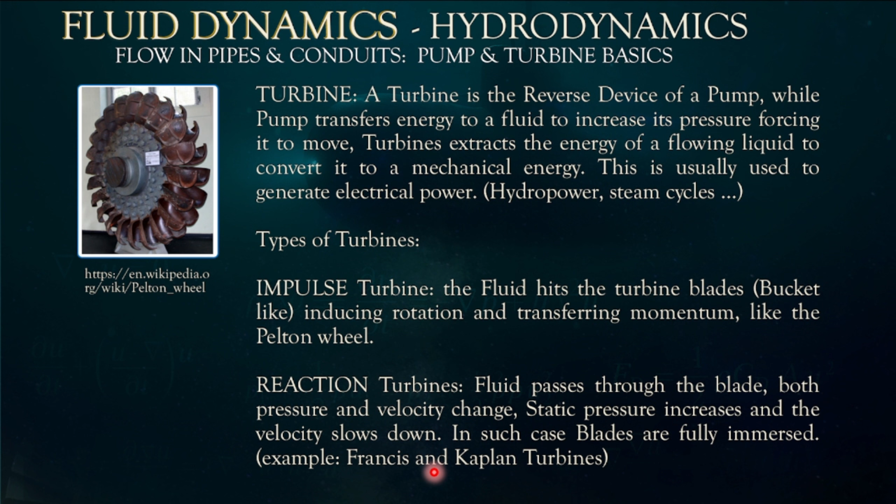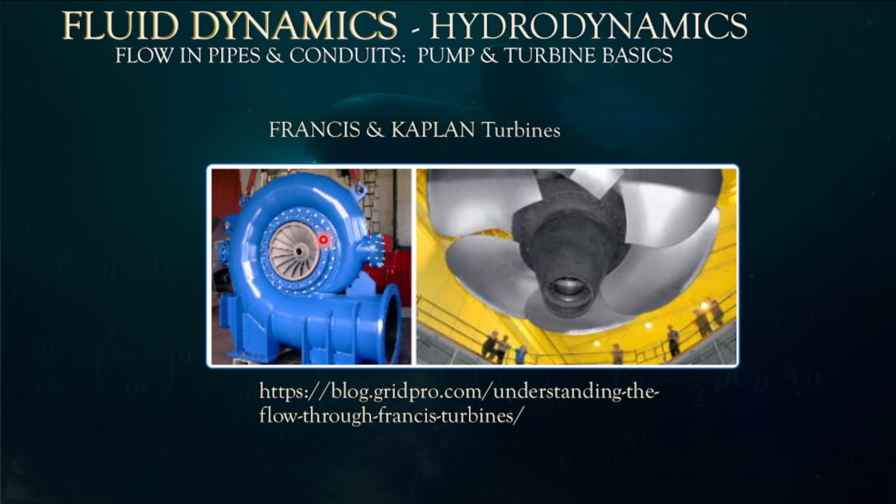And this is actually the Francis turbine, where both velocity and pressure are changing to rotate the blade. So not only impulse works here, but also the velocity of the fluid that is pressurized. This pressurization, or narrowing of the tube, increases the dynamic pressure of the fluid, causing the blades to rotate at very high speed. It's very effective, by the way — the Francis turbine is a very effective engineering feat.

Let's talk about the differences between Pelton, Francis, and Kaplan turbines. First, in the Pelton turbine, rotation is generated by pure impulse force of water jets dropping on the bucket-like blades, turning them and driving the rotation of these blades. The main, or driving, energy is actually kinetic.

As for the Kaplan turbine, on the other hand, it is immersed in the liquid and the rotation power is generated through the differential of pressure from up to down. The blades react to that pressure difference from a wider to a more constricted flow, which turns these turbines. As the liquid accelerates due to a narrower tube, it rotates the blades, producing energy.

As for the Francis turbine, power is generated via both impulsive and reactive forces. The impulsive is actually the impact of the fluid against the turbine, and the reactive forces are due to the change of dynamic pressure, as we mentioned. As you narrow down the tube, the dynamic pressure increases because of the increase of velocity when the water is constricted to a narrower width pipe, which makes the blades rotate at a very high speed.

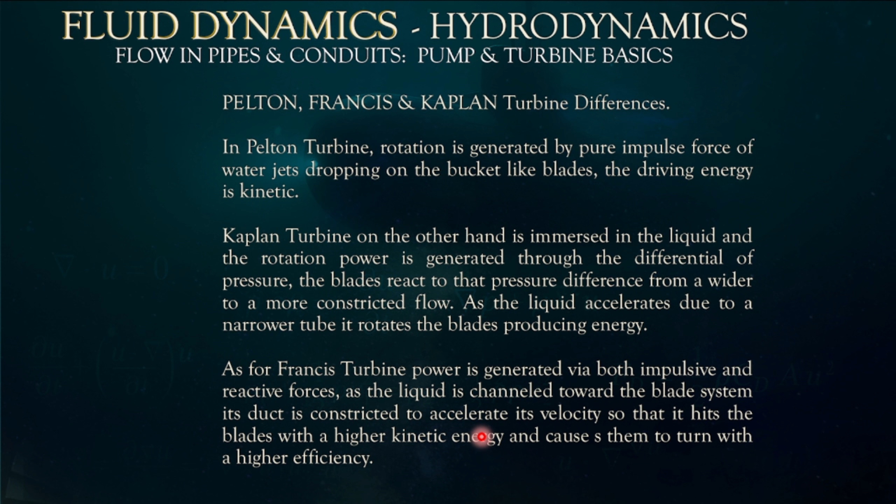As the liquid is channeled toward the blade system, its duct is constricted to accelerate its velocity so that it hits the blades with a higher kinetic energy and causes them to turn with a very high efficiency and speed, producing an effective power.

As for the hydraulic power being extracted from the turbine, it has the same formula as for pumps, which is P equal rho G Q H. Notice it's the same as power generated by a pump, except the pump transfers power to the fluid, while turbines extract power. In both cases, rho is the density, G is the acceleration of gravity, Q is the flow rate in meter cube per second, and H is the head pressure.

The turbine efficiency eta equals P shaft divided by rho G H Q. In other words, rho G H Q is the input power generated from the rotation of the turbine, and it should be multiplied by eta, the efficiency factor, to get the actual power at the exit of the shaft. There is a loss of energy within the mechanism of the turbine, determined by eta.

It's the same concept concerning pumps, but the difference is that the pump gives energy, while here we are extracting energy from the turbine to turn it into mechanical energy and then into electrical power.

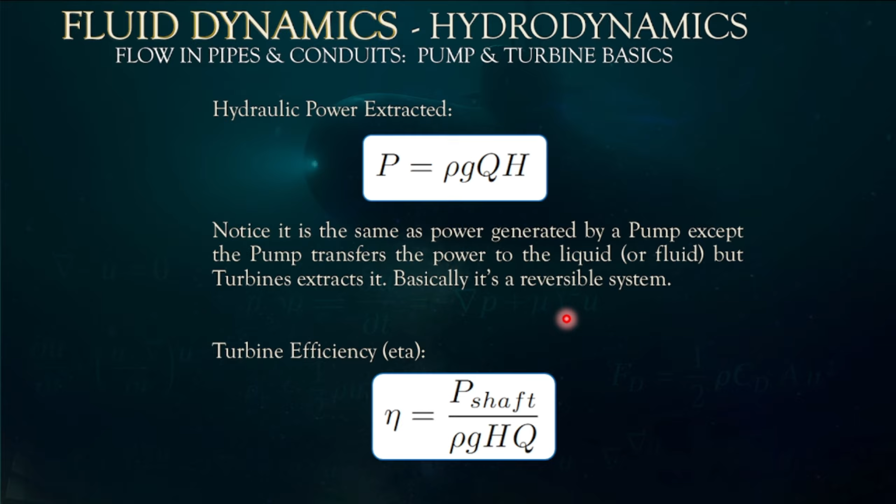Euler's turbine equation, used in reaction turbines to analyze velocity components, is P equal rho Q times (U1 VU1 minus U2 VU2), where Vu is the tangential velocity. There's a differential of velocity between the incoming flow and the outgoing flow exiting the system after turning the turbine, and U is the blade velocity.

This is the power being generated by a reactive turbine, or reaction turbine, such as Kaplan and Francis turbines.

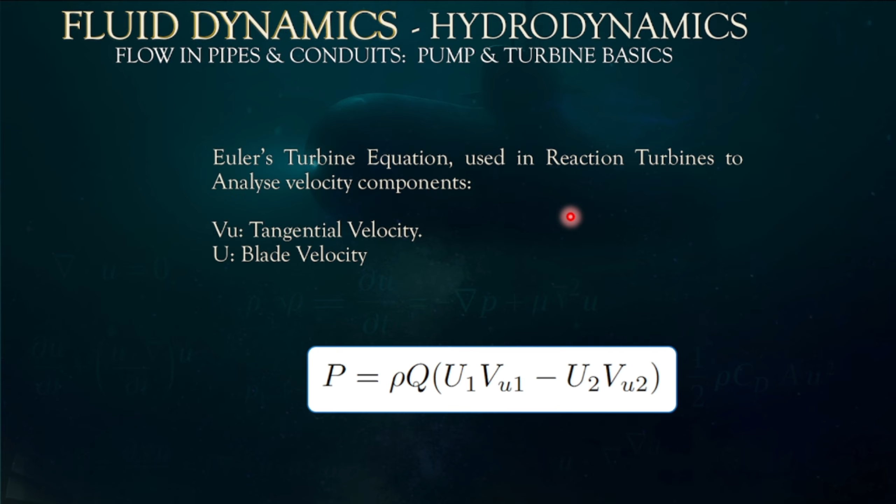Another factor used to compare turbine types by quantifying performance is the NS value, or specific speed, as a comparison. For Pelton turbines, NS equals 10 to 35. For Francis, 60 to 300. For Kaplan design, above 300.

NS is equal to N times the square root of P, the power in watts, divided by the head pressure to the power of 5 over 4, where N is the rotational speed in RPM and P is the power in watts.

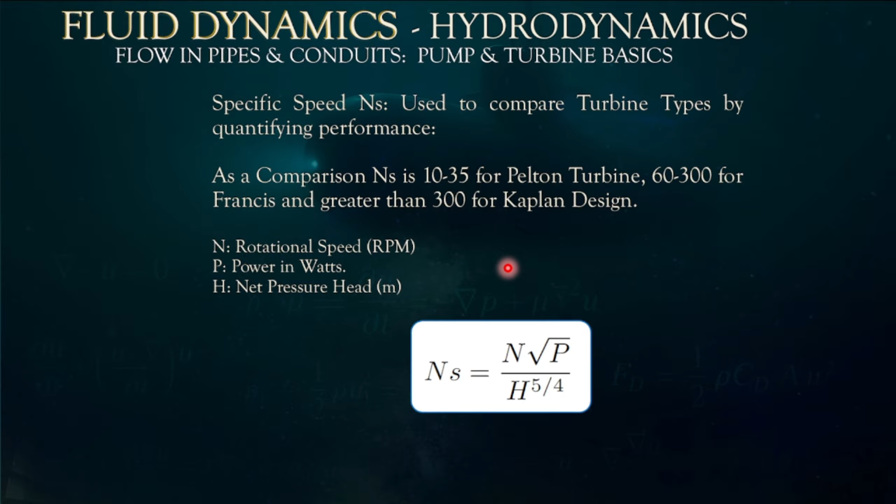Let's do an exercise for turbines and pumps. This is an example for a turbine. The flow rate Q is equal to 2.5 meter cube per second for a specific turbine. The net head, or total head pressure, is equal to 30 meters. Efficiency is 85%, or 0.85. Water density is 1000 kilograms per meter cube for water at 20 degrees.

Let's calculate the hydraulic power. The power of the fluid equals rho G H Q, equal to 1000 times 9.81 (the gravitational acceleration) times the net head of 30 meters times Q, the flow rate of 2.5 meter cube per second, which equals 735,750. Now, this is not the effective power being produced.

The power at the shaft equals the power of the fluid times eta, the efficiency factor of the turbine, which is 85%. So it's equal to 735,750 times 85%, which is approximately 625 kilowatts, or 625,387 watts.

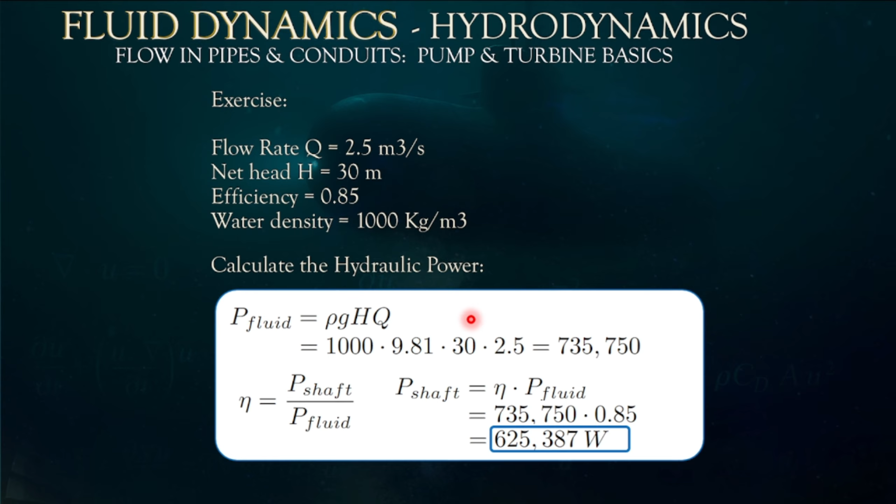Open channel flow. Let's talk about the characteristics, different features, and equations of open channels. An open channel is water flowing through a canal, for example, where you don't have a closed pipe. The water itself is exposed to atmospheric pressure and flows freely, usually through gravity instead of a driving force that is energetic or electrical, such as in the example of pumps.

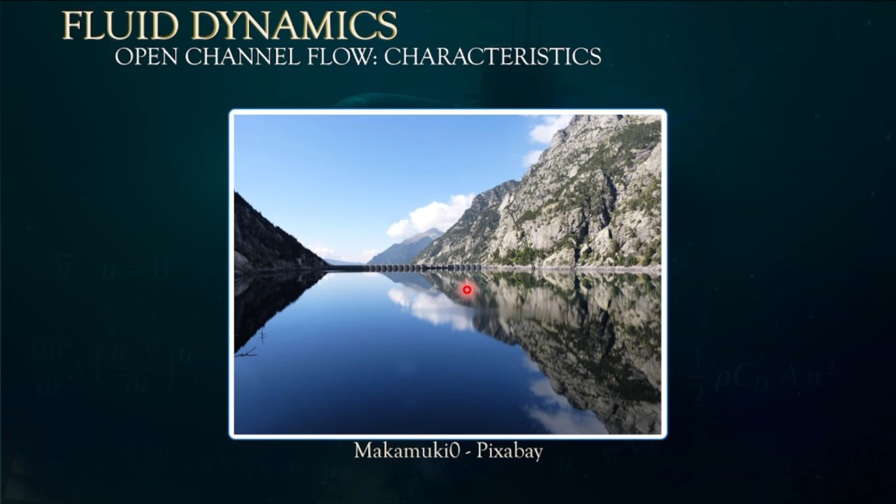What is open channel flow again? It technically refers to the movement of a liquid with a free, uncovered surface which is not pressurized, unlike pipe flow, such as in rivers, canals, drains, and irrigation systems. It is exposed to atmospheric pressure, and the driving force is gravity, not electrical or mechanical power.

The types of flow in such systems are steady versus unsteady, where depth and velocity change with time in unsteady flows, and uniform versus non-uniform, meaning flow depth and velocity change along the channel in non-uniform regimes but remain constant in uniform ones. So mainly, flow depth and velocity are changing for the liquid, particularly the depth, or the wetted part, of the canal.

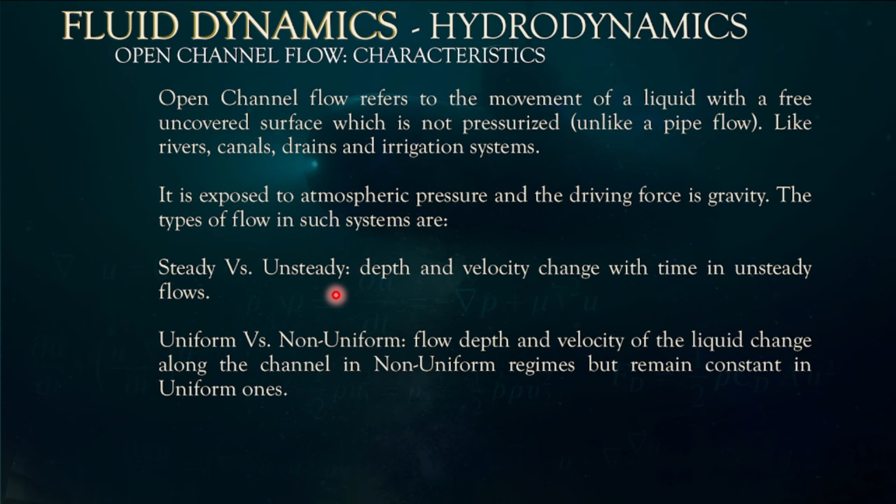Another main characteristic of an open channel is the type of flow, which is divided into three types: subcritical, critical, and supercritical. Subcritical, in short, is when the flow is very slow, almost not even happening.

Critical gives you the minimum specific energy for a flow to occur. Supercritical would be flowing very fast, meaning the velocity is super high in relation to the depth of the fluid. An example is a shallow river with a high slope where the water flows very fast, and in such case the water would be very turbulent.

These types are based on a metric called Froude's number, which determines the velocity ratio of the flow versus the depth of water. The formula for Froude's number is very important to determine the type of flow. Froude's number equals velocity in meters per second divided by the square root of the gravitational acceleration times d, the depth of water.

The depth itself is equal to the cross-sectional area of the channel divided by t, the top width of the water surface, or the width of the water within the channel from bank to bank. G, the gravitational acceleration, is equal to 9.81 meters per second squared.

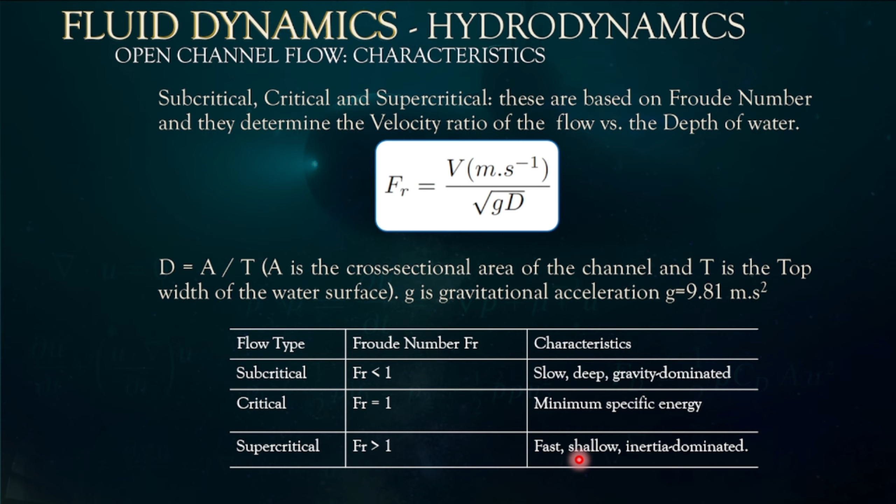Other parameters are the depth of water within the channel, velocity v, cross-sectional area A, which is the cross-section of the river or channel, and wetted perimeter. Wetted perimeter is actually the length of the river bank section under water.

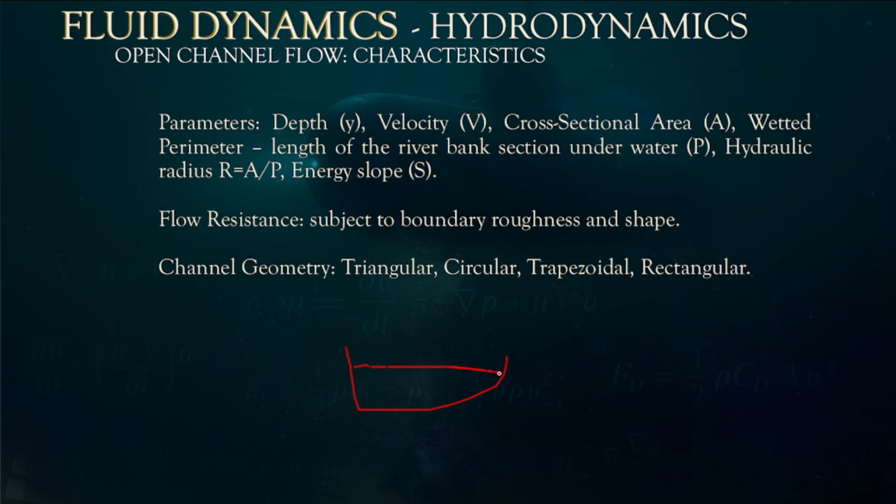Plus you have hydraulic radius R, equal to A divided by P, the cross-sectional area divided by the wetted perimeter, and energy slope, which is the slope of the river. So let's say this is the river, you have a very high slope here where the water would be flowing very fast. Flow resistance is also subject to boundary roughness and shape, another parameter.

Boundary roughness depends on the type of material within the channel and the shape - whether it is triangular, circular, trapezoidal - actually that's the channel geometry. Here we're talking more about the shape of boundaries. They both play a role in the flow. The channel geometry might have a triangular channel, usually for irrigation or something. You have the circular usually for sewage, trapezoidal for channeling water, and rectangular.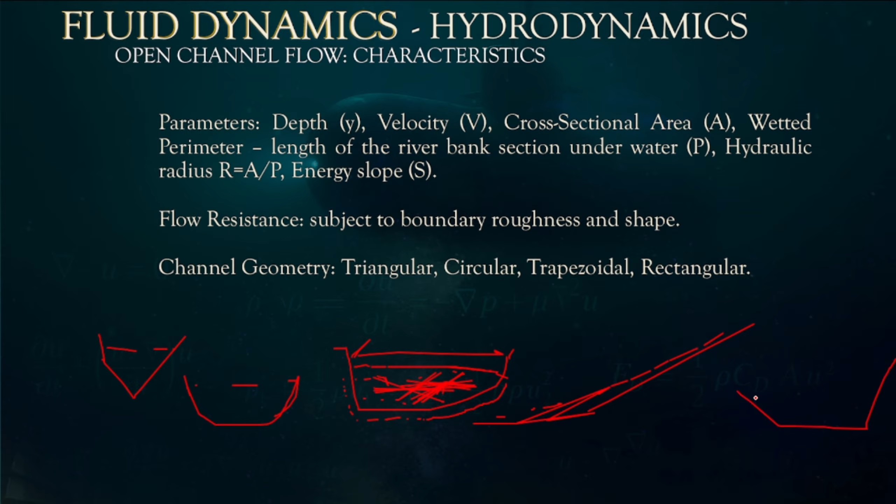Specific energy is a concept in open channel flow that helps relate flow depth, velocity, and energy together in one equation, which is critical to classify flow types and design a channel. This is usually used for the purpose of deciding how to design a channel.

Specific energy E is the energy per unit weight of water measured relative to the channel bottom at a given cross section. So E equals Y plus V squared over 2G, where Y is the flow depth and V squared is the square of the velocity, divided by 2G, or 2 times the acceleration of gravity.

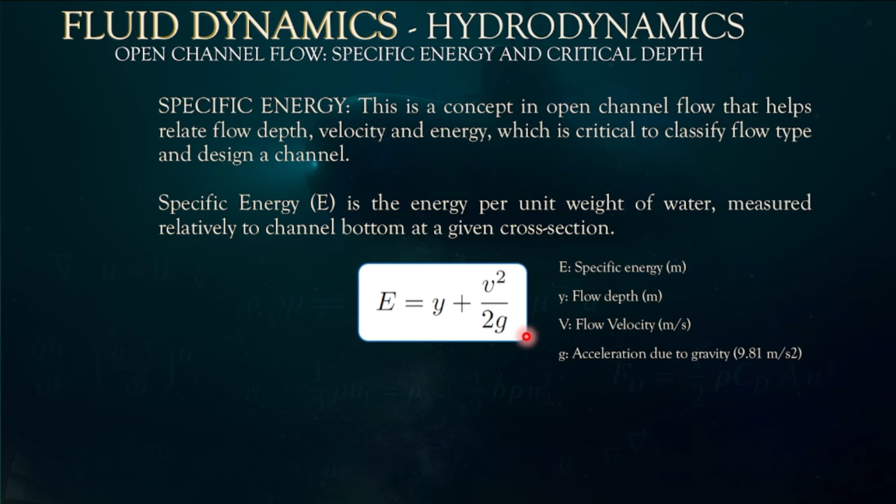Another parameter is critical depth, designated Yn or Yc. Critical depth is the flow depth at which the specific energy is minimum for a given discharge. Discharge means when the water is being pushed out, or thrown out of the end of a duct. That is the discharge.

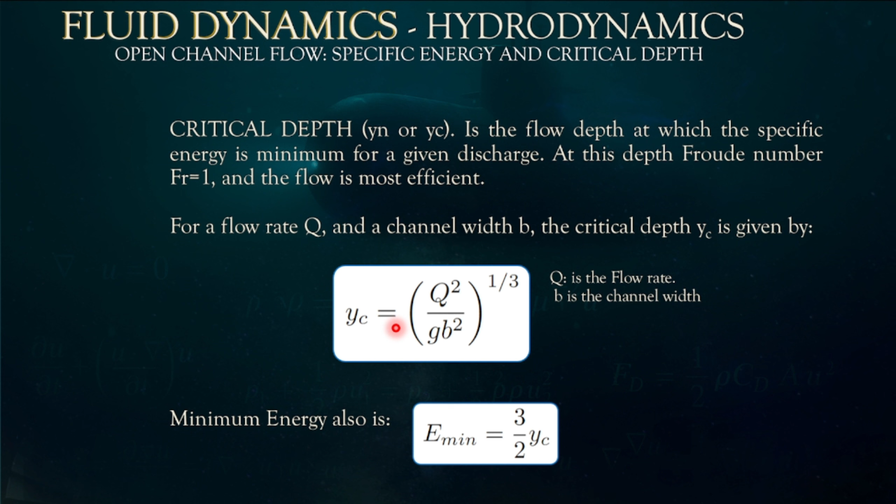At this depth, the Froude number Fr is equal to 1, and the flow is the most efficient. So for a flow rate Q and a channel width B, the critical depth Yc is equal to Q squared, which is the flow rate in meters cubed per second, divided by G times B squared, together to the power of 1/3. So the minimum energy E minimum is equal to 3/2 Yc. In other words, the critical depth is the actual depth where you have the most optimal performance for a flow.

Uniform flow is a flow in which the depth, velocity, and cross-sectional area are constant along the length of a channel. For example, a rectangular water draining channel. The flow is steady and the channel slope is equal to the energy grade line and equal to the slope of the water surface. There are no jumps or transitions within the flow when it comes to velocity or depth, and the flow is stable.

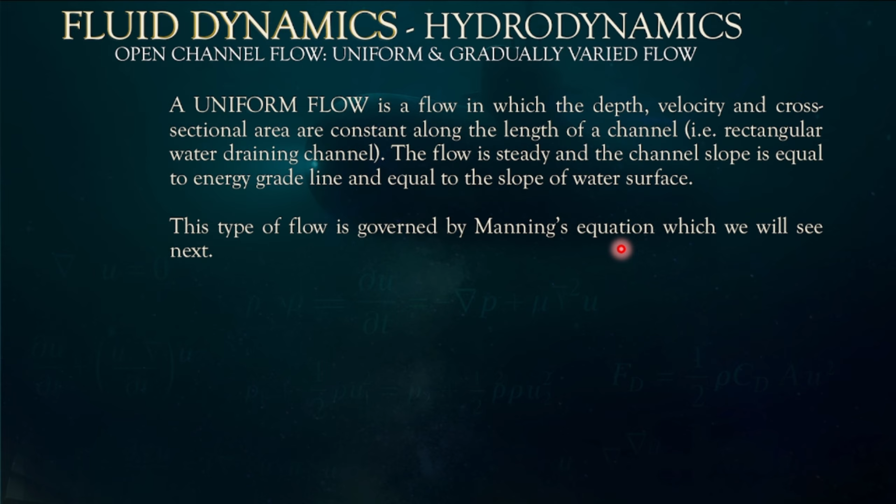This type of flow is governed by Manning's equation, which we will see in the next slide. Manning's equation is a formula used to estimate the velocity and flow rate of water in open channels. It can be used for other types of fluids, but usually it is more used for water, such as rivers and ditches, for open channels.

And R, the hydraulic radius, is A, the cross-sectional area, divided by the wetted perimeter. S is the slope of descent, for example the riverbed slope. So the velocity V is equal to 1 divided by N, again Manning's roughness coefficient depending on channel material, multiplied by R to the power of 2/3, multiplied by S to the power of 1/2, the square root of S.

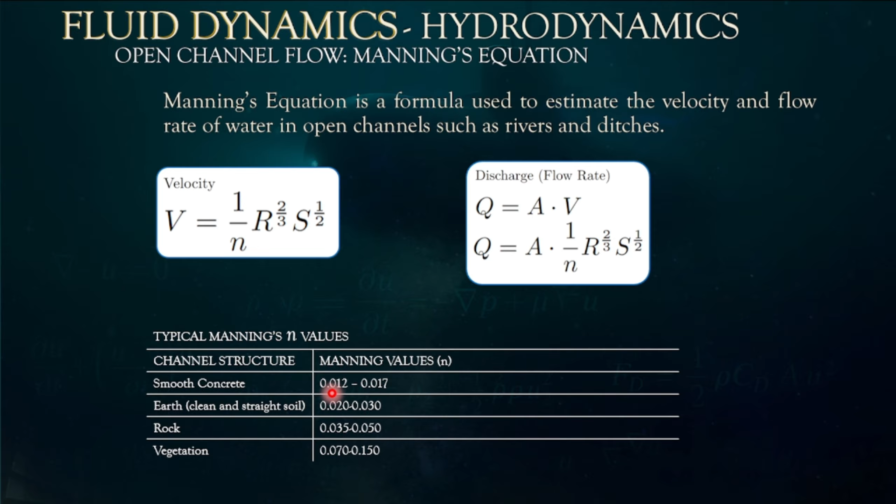The typical Manning's N values depend on channel structure. For smooth concrete, 0.012 to 0.017. For earth, clean and straight soil, 0.02 to 0.03. For rock, 0.035 to 0.05. And for vegetation, the value is between 0.07 and 0.150, because vegetation stifles the velocity. Velocity is inversely proportional to N, so for higher values of N, or rougher and more complex channels with more obstacles, you have a lower velocity.

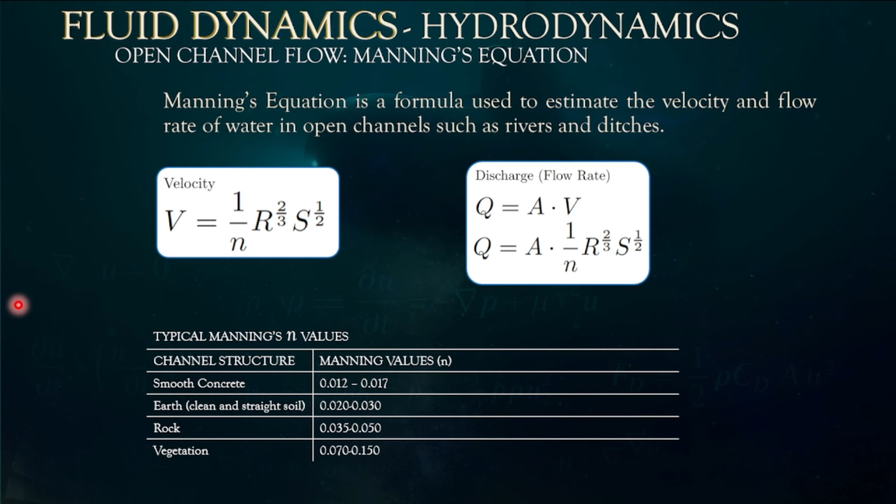Gradually varied flow, or GVF, is a flow where the depth changes gradually along the length. This flow is non-uniform, so the depth varies due to changes in slope. This is usually done on purpose in order to slow down a flow, like at the end of a duct, when it throws water into a basin. This is one of the applications. The depth varies due to changes in slope, changes in cross-section, and the presence of obstacles. It can also occur by nature.

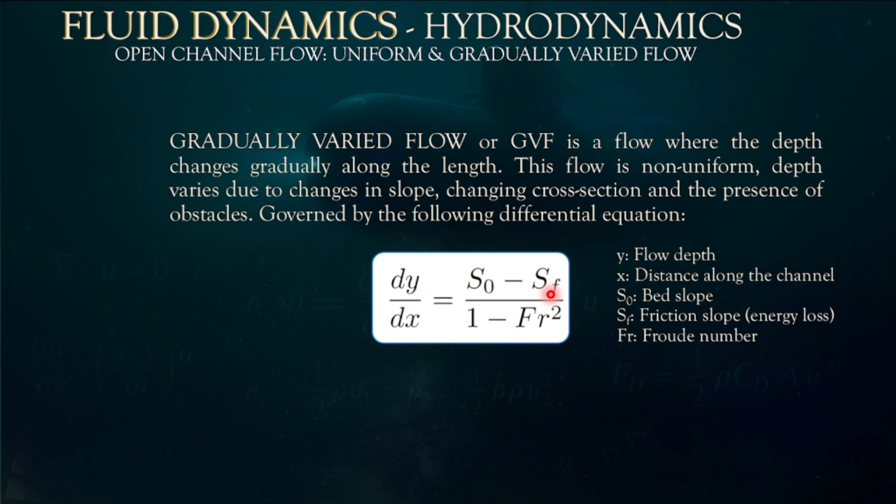This is governed by the following differential equation: dy over dx, where y is the flow depth. So the change of depth over a distance dx, or delta x, is equal to S0 minus SF, which is the difference of the slope from the first point to the second point, divided by 1 minus Froude's number squared. FR is the Froude's number. So dy over dx, or the change of flow depth in relation to the change of distance, is equal to the original bed slope minus the riverbed slope that is rougher, divided by 1 minus Froude's number squared.

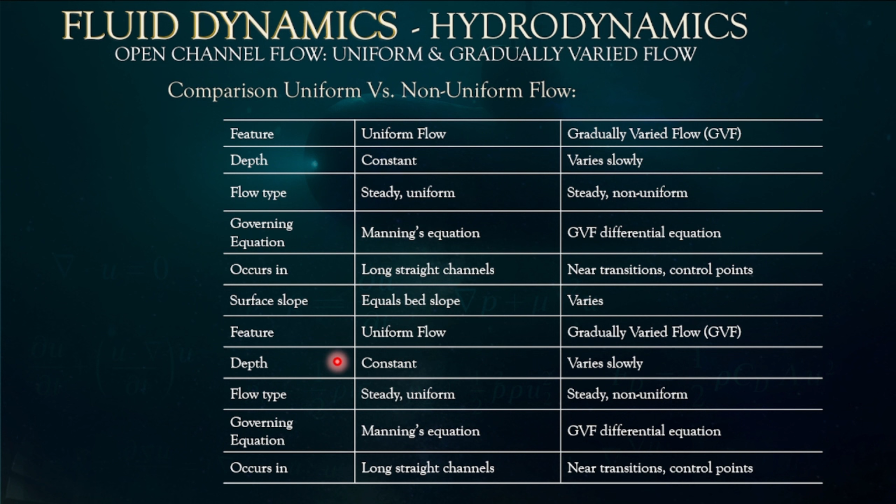Uniform flow occurs in long straight channels, but GVF occurs near transitions and control points, like near a dam. The surface slope for uniform flow is always equal to the bed slope - it doesn't change - but it varies for GVF. The flow is uniform for uniform flow, but changes gradually for GVF. The depth is constant for uniform flow, but changes for GVF. These points have been repeated twice, sorry for that.

This transition is accompanied by a rapid increase in water depth and a loss of energy, which is the purpose. When you transition from high velocity, low depth to higher depth and low velocity, this is accompanied by a rapid increase in water depth and an energy loss. One way it happens is when flowing channel water needs to be stored in a reservoir, so this is done on purpose.

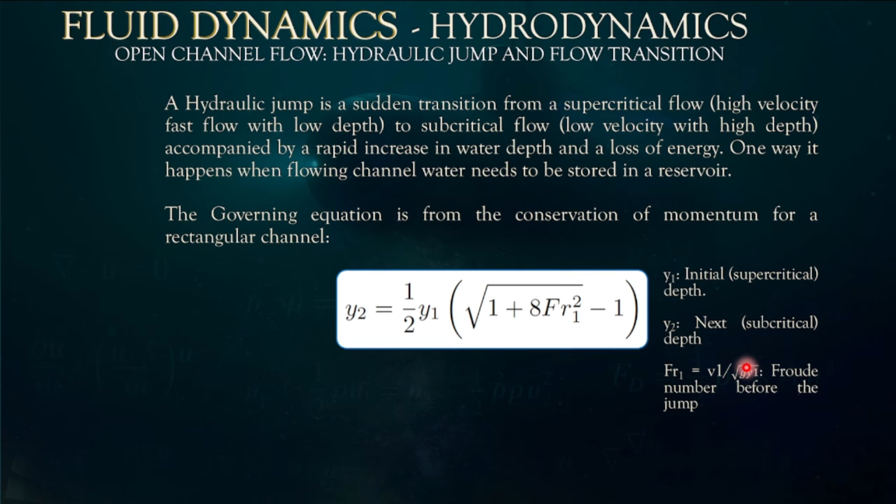In a hydraulic jump, significant energy is lost after the sudden change of depth due to turbulence, which is a sudden disruption of laminar flow, heat, and locally formed swirls, also called eddies. This turbulence causes a lot of energy loss because the streamlines of the flow have been broken, so the same momentum that was pushing the water forward is now partially rotating around a central axis, forming these swirls. This is one way energy is lost.

This is induced on purpose in dam spillways and channels to dissipate energy and protect the channels from scraping and erosion due to high drag forces against the bottom and side barriers, so it won't scrape or erode them.

Delta E equals E1 minus E2, which equals Y2 minus Y1, to the power of 3, divided by 4 times Y1 times Y2, where Y2 is the second depth and Y1 is the initial supercritical depth.

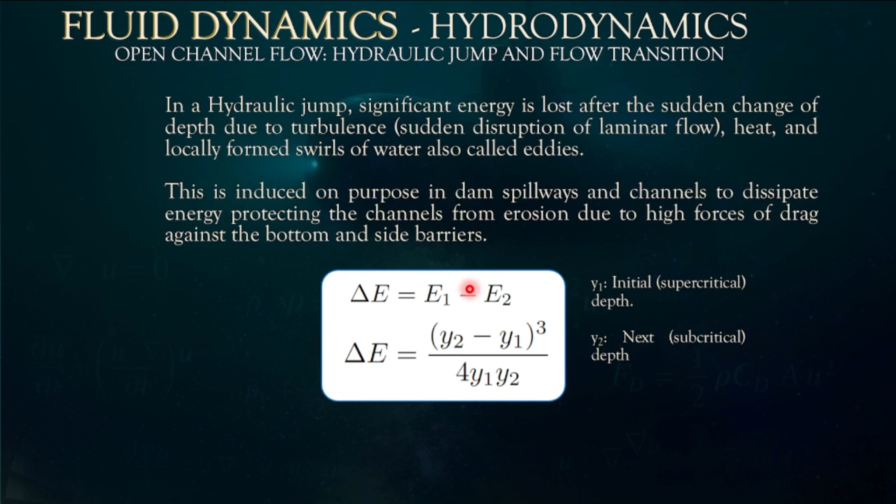Flow transition refers to a change in the flow regime from one type to another, like from subcritical to supercritical, which we just addressed. Let's list the types of transitions. The first is subcritical to supercritical, which occurs when the flow passes through a control such as a channel contraction, a narrower channel, or a sluice gate. The flow grows faster, not because of narrowing, but because the depth becomes shallower. You have a control where there's a transition from subcritical to supercritical, and the water starts flowing faster depending on parameters from equations like Manning's equation.

Supercritical to subcritical occurs naturally or by design, either at the end of a river as it washes into a lake, or in a dissipation channel to slow down the water flow. It often results in a hydraulic jump, which, as mentioned, slows down the water.

Critical flow occurs when the flow is exactly at critical conditions, so Froude's number equals 1, which is the minimum energy required for the flow to take place. Usually it's ideal. Why? Let's say we're talking about sediment transfer from one place to another, like a sewage system. A supercritical regime would make the water flow too fast, leaving the sediment behind, stuck at the bottom of the channel. On the other hand, a subcritical regime would make the water so slow that it won't move, so the sewage would be stuck and won't flow correctly. That's why in such a case you need critical flow in the sewage system, to transfer the sediment effectively to the other endpoint, like discharging it into the sea.

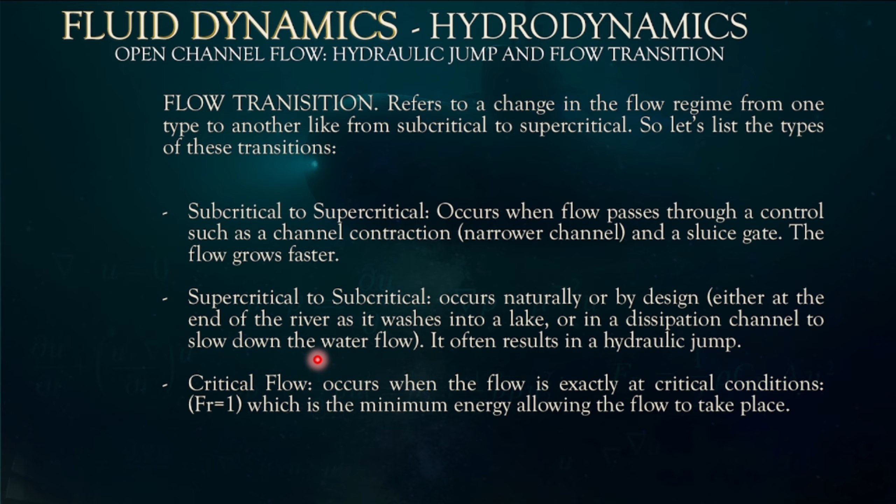Since you've stuck with me so far in the video, I'd like to share some references to water and flow, even in the Bible. The first one: 'He who believes in me,' says Jesus, 'as the scripture has said, out of his belly shall flow rivers of living water,' John 7:38. 'When you go through the deep waters, I will be with you,' Isaiah 43:2. 'They will neither hunger nor thirst, nor will the desert heat of the sun beat down on them. He who has compassion on them will guide them and lead them beside springs of water,' Isaiah 49:10. 'The Lord will guide you always. He will satisfy your needs in a sun-scorched land and will strengthen your frame. You will be like a well-watered garden, like a spring whose waters never fail,' that's supposedly a continuous flow, Isaiah 58:11. And here's an interesting one: 'Out of his belly shall flow rivers of living water.' It is a flow, it is real water, it's real living water here.